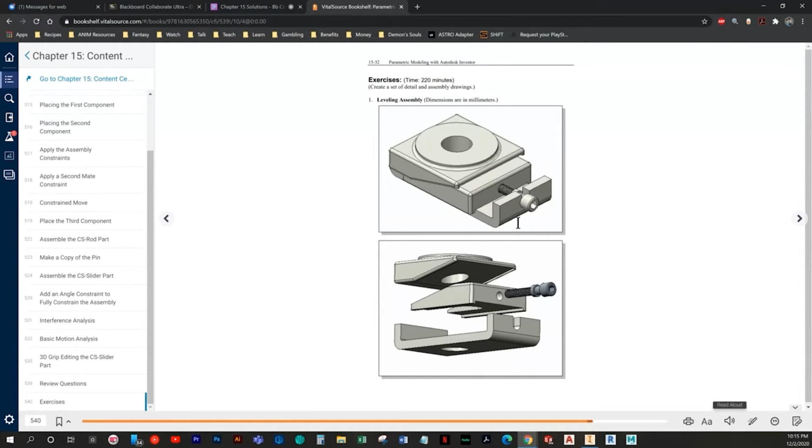Well, hey there, everybody. So today we're going to work on Chapter 15, and it's only 2 assemblies, but they're going to be quite time-consuming. We'll have these parts to model, then it'll have to be assembled, and then it requires a set of detail and assembly drawings. So it's going to be what looks like not a lot of work, but it's actually going to be pretty time-consuming. So we'll go ahead and get into it and start off with this base plate.

And it appears it's millimeters, so make sure you're on your metric templates. I'm going to draw these in the positions they're shown, except for this one. I'll probably do this one to correspond with this part, so I'll draw it on the same plane as this one.

So I'm just going to draw on the front plane, and as always, I'll just draw a rough profile. Make sure you're doing vertical lines and horizontal, that way we get those implied constraints in there. And then I'll just draw here and trim off the rest.

Alright, so then we have fillets on both ends, so what I'm going to do is just slap in fillets on all of them, and then I'll set dimensions after. So for now, I'll do an overall width of 160. And then we have 2 for this one, and 10 for the outside ones.

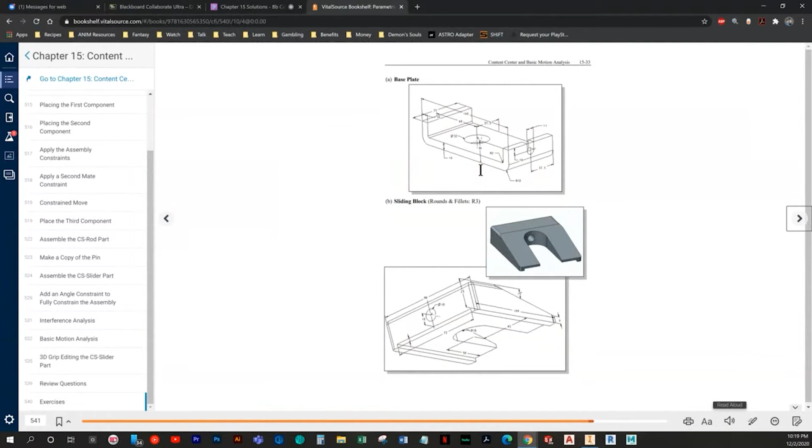And then I can extrude both ways with our value of, let's double check that, I believe that's the 75, but yeah, 75. And obviously that makes sense because half of that is to the hole, so 75.

And let's see, so we'll go ahead and do this hole here. Alright, and it is 37.5, like we were talking about a minute ago, which is half of 75.

And then it's 60. It's really hard to tell, but to me, that reads as... I think that's to the outside edge, because, well, I don't know, let me think about that for a minute. So if we had 60 here and we assume it's 60 there, 10 and 10, that's 20. That'll only be 140.

Let's do the outside edge. It visually looks like it's probably that, and there's no reasonable math that says it's one or the other. If we end up having to change that later because we see something in the assembly that says this doesn't line up, then we'll change it then. But for now, we'll roll with it.

And we can go ahead and just do a cut. And then we'll do this little portion here.

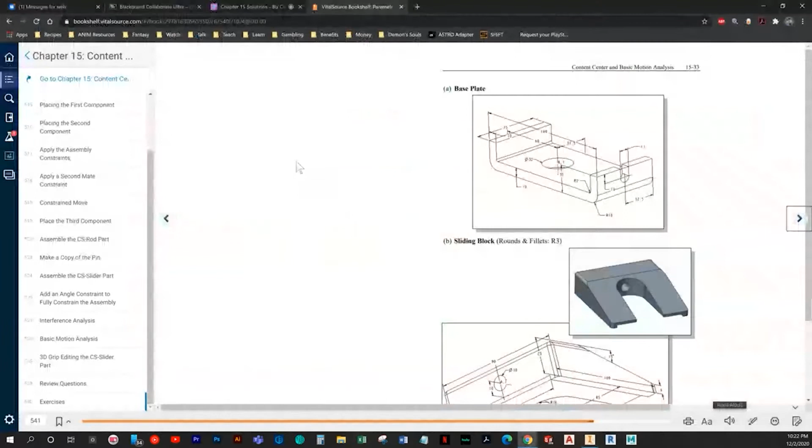Alright, so we'll go ahead and jump to the next one, which will be the sliding block.

Just to make sure I'm drawing it on the correct plane, so we have this one here. The block is going to be the middle piece, so it's going to be slanted down in that same view, so really it needs to be drawn 180 degrees to this. That's going to be a pain for some people, so I think I may just draw it with this as the front view, just so it's not overly complicated. We'll just see where this lands and go from there. I think it'll be fine.

Okay, so we've got a slant and then a horizontal, and whatever, something like that. Okay, so then we'll trim out some of the goods.

And man, some of this is just really tiny. Alright, so it's going to be 6, 15 for the angle, 25 overall height.

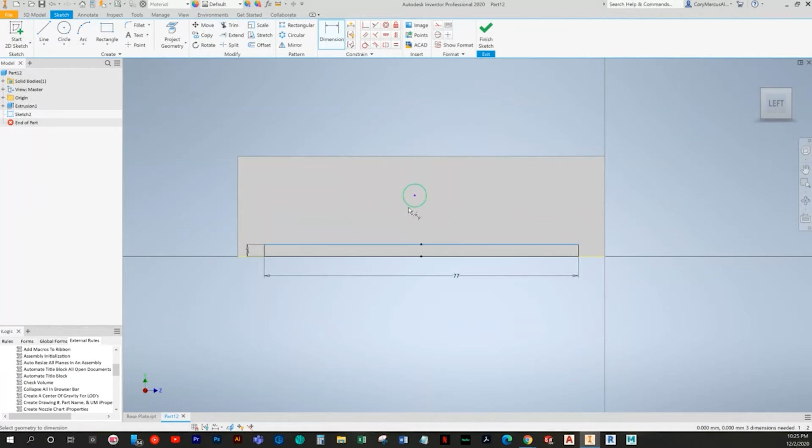And I believe it was also 10 in size, we'll double check that. Yep. Alright, so then we can go ahead and extrude these both out.

Okay. So now, obviously we have a cutout, but we've got that back drawn. So we can do, I guess, a bottom view. And it's going to be your typical lug style shape.

Okay, so put in our constraints. There's no way that just perfectly touches it. Well, apparently it does. How about that? Okay, no biggie.

Alright, so we've got a... Oh, I was wrong, it actually went to the center.

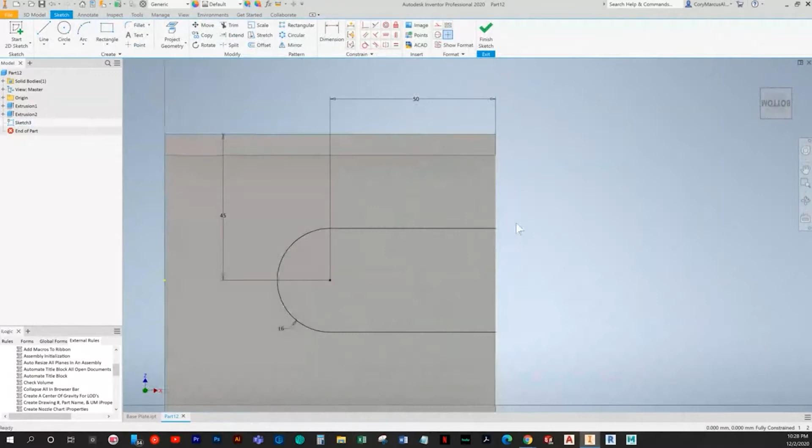So now that we've got that, I actually still do have to go back in here. So I turned this line to construction earlier, but it didn't allow a closed boundary at that point. So make sure it's not construction there.

Okay, so now we've got the part itself, we just have to add in the fillets. And they're a radius of 3.

And let's see, so we have the vertical edge here, and on the back we've got this edge and this edge and that edge. Just double check here on the front, so also we have this edge and that edge.

And that looks to be it, actually. Let me just double check. There's not one here, yeah, okay. So we can go ahead and save this part as sliding block.

And we'll jump to the lifting block. Now this part, it's a little more complicated, but nothing crazy. I do want to make sure there wasn't like a hole thread note or anything. Okay, there wasn't.

Our fillets note is up here, but we'll go ahead and start. Alright, so this will be our front view. And it's pretty much like the other one as far as form.

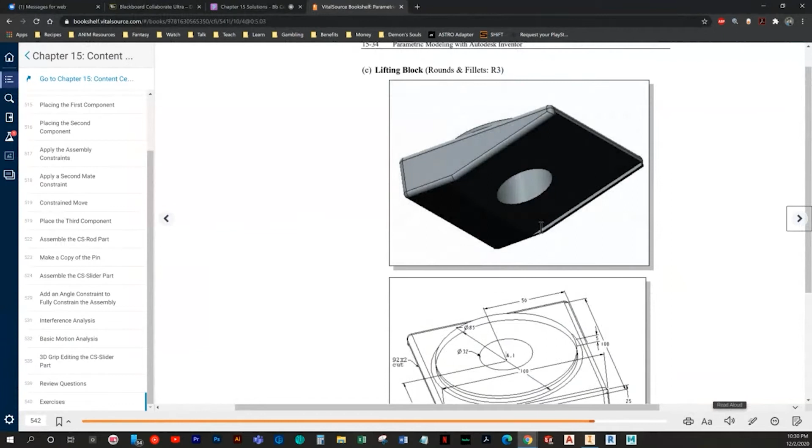And let's see. I'm not sure which plane we'll use. I guess we can. We'll make this point here coincident to the origin to fully constrain it. And its width is 100. All right, so then we have, it's kind of hard to see here, but it looks like a boss coming out the top with a hole through all. So we'll go ahead and draw that.

Okay. Okay, so for a minute I was actually thinking that this 100 dimension was part of a diameter circle because it just happens to be right over the diameter dimension, but it's just the width. That's poor dimension placement. So it is just an 85 dimension diameter with a 32. So I can go ahead and slap those in. And then it's 50 by 50. So I can slap those in as well.

And then we can extrude up 5. Turn on our sketch visibility so we can reuse that feature for sketch. I'll turn that sketch visibility back off. Okay, so now we just need a cut and we can add in our fillets. So this one's kind of tricky, but what you want to do is draw on this plane, and we just need to project these edges. I'm not sure how far it goes yet. I'm kind of just drawing these on the fly, of course.

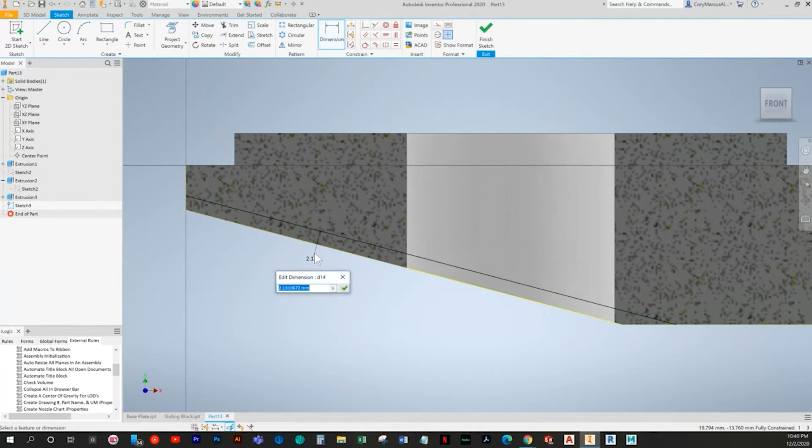Okay, so it's 92 by 2. So let's start by offsetting this edge, and I'm going to extend this back because this part wouldn't exist, nor would this. So I'll extend here as well. And I'm just going to slap in a very generic 2. And if you've got all your stuff projected, then you no longer need to add anything. So you can just do the same as I did and just get to cutting. So it's 92. And you end up with a nice little shape like this.

So then you just need to add fillets of 3. Okay, so clearly we know we need this one. Appears we pretty much need every edge on this one. Okay, so we've got that one, that, and here. It's going to be here, there, and it's going to be the same on the other side, of course. Make sure we got all of our edges. Okay, so basically anything that touches. Now, since we're going through here, I guess I could look at this edge, but I'm going to leave it not filleted. And we can save it as lifting block.

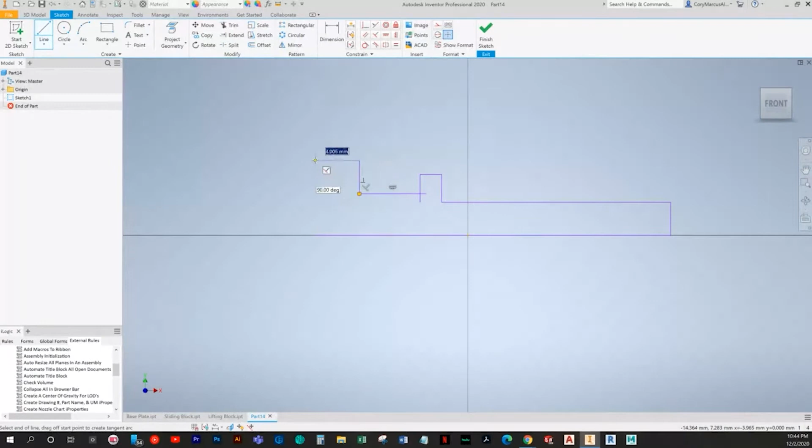And it's 72 long, noticed. And I'm going to do this as the front view. And of course it'll be a revolve, so I'm going to do basically that in half. Okay, so we've got a very long shaft. It's probably good not to make everything in line, or it may imply some constraints. I'm just going to trim out some of this to make sure it's uneven. Okay, so overall 72. I'm going to make this line a center line and make the midpoint coincident to the origin point. We've got a width of 12, 11, and 5.

It's kind of hard to see this. So this is 14. The diameter is 10 for the actual screw part. And this middle portion is 10. And this is 16. Okay, so we've got a head hole, so we can draw this portion, go ahead and revolve it. And I could add the chamfer in here, but I really like to have my chamfers elsewhere. So it's nice to have it as a feature. It's really easy to add and manipulate later if needed.

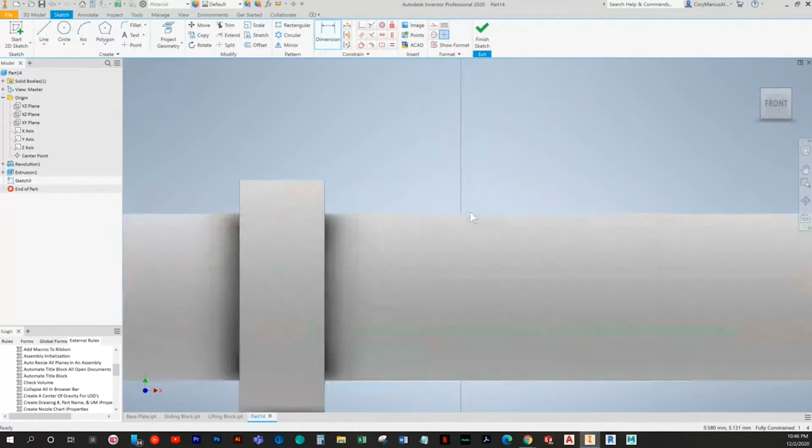Okay, so now we've got a nice little hole. I'm going to go ahead and just talk about the coil feature in case you do want to use it. It depends how you want to go about it, but it's usually a lot easier to draw a triangle that is cut in half here, and I'll just show you roughly how it would look. It's not something I really would advise doing right now, just because, like I said, you really don't know what you're doing at this point.

But you never know. You might like what you see when you do it and go for it. I don't know what the height is, so I'm just going to give it a value of 1. And then, for instance, I could do a coincident for this point to these two edges. Okay, you know what? We'll just do a collinear here.

Okay, so now say I had this. I could do a coil command, and I could choose an axis once it chooses that profile. And I don't know how long this was, so we'll just say I have 10 rotations of this. Obviously that's super long, but it's fine for the sake of showing this. The pitch would be whatever the actual width is. I didn't measure, but I'm guessing it's 1 since it looks to be equal in size.

So I could go do like 20, 40, 45, whatever. So it's roughly 44. So when I do that coil command, it also actually is preferred to go further, and I forget that it has this little extra portion. So really, instead of halfway, it's a little bit easier to, let's delete this line, delete that constraint.

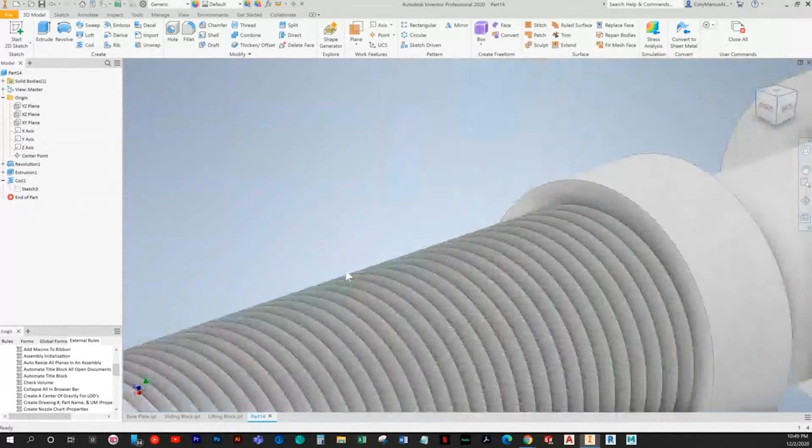Okay, so it would be better in this case to start it with this corner completely in the head. And basically what that enables you to do is start completely in a model, so there's no transition. You see that line right there, and hopefully this doesn't crash my computer like it's acting like it's going to. Whew, it's really thinking, wasn't it? Okay, so now we've got this perfect transition, and it looks nice.

But you would have to do the math to make sure it's not too big as it is now, and you want it to come out perfectly at the end and all of that. You would have to do a chamfer on it, and it's quite a bit of work for somebody that doesn't know anything about fasteners. So it's a coil command, and you could also just cut away instead of adding like I did, but that's the general premise behind it. I wouldn't advise it. That's for down the road.

So for now, let's just do a thread command, and it's going to be an M10 by 1.5. And we want it to be from the other end. I've noticed the tool is kind of finicky about that. It's all about which end you click on. So if I click on this side, it starts there. If I click on this side, it starts here. So it runs the full length, but in case you don't have it set to full depth, that's one of the things you need to know. So it's M10 by 1.5.

So then the only thing we're missing is our chamfer. And the reason I put the chamfer after is because, if you have to adjust it later, it avoids it not knowing where the correct end is. So I would advise doing it after the fact, always. And we only have to put in a length because it's a 45-degree angle. So that's it. We'll name this adjusting screw. And then we can jump into the basic motion analysis.

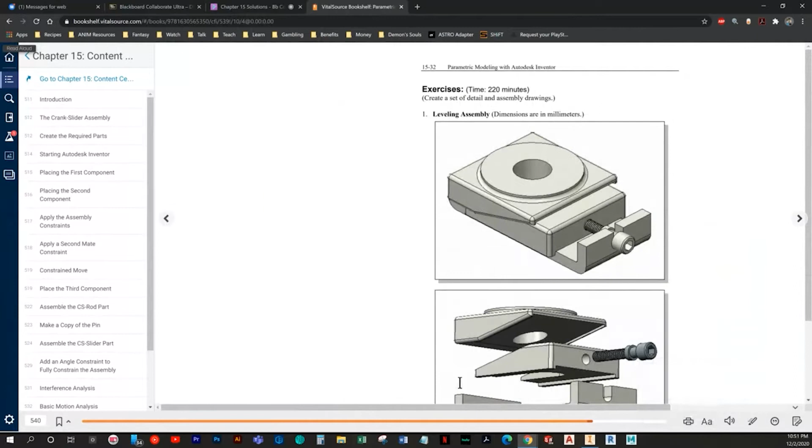So we make an assembly here and slap it all together, and then I believe we do the analysis. So let's just take a look and make sure. Yeah, okay, cool. We'll just need to do a drive constraint, animation, interference analysis. I'm going to go back to the assembly so I can see what I'm slapping together here. Okay. So first of all, I'll just do a place and choose all of our hoopla.

Just paste it all in. Hopefully nothing was grounded. I don't see a ground symbol, but just to double check. And I'm a little petty. I like to have shaded with edges on, so I'm going to go in and change that. Now since this is our base plate, I'm going to use it as our foundational piece and constrain it to the origin.

So I'm going to do XY to XY. Hopefully each one of these planes should correspond pretty well, and they do. That's the perk of drawing it on the same planes as the origin plane. It tends to be a lot easier to work with for sure. Okay, so next is this guy. I'm just going to move some of this stuff out of the way as we go.

Alright, so this one resides here. And then, let's see, so it mentioned analysis, but I didn't really pay attention to which parts. So between the sliding block and the base plate parts. Okay, so that's the lifting block. Okay, so yeah, this is the one I need to do it on.

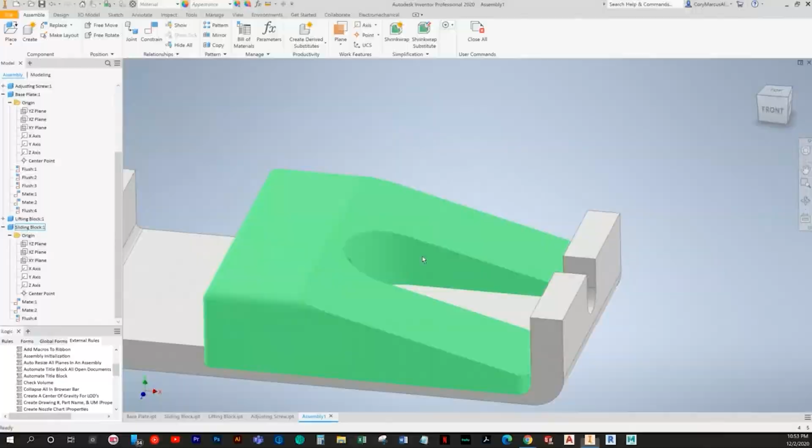So when I hit this, I change the selections, and then it actually, oh my gosh, I'm tripping. I'm sorry, guys. Okay, I had it right to begin with. No, I didn't. Okay. Sorry, long day. I'm going to delete these two constraints.

Or I guess I could flip this one to be a mate. It's going to error out. I hit accept, and I'll delete this mate. Okay. Now that looks like it's supposed to. So now I just need to constrain this face to this face. And our hole lines up fine. Cool.

And as you see, our groove fits. So I was just making sure. You never know with that kind of stuff. The one thing I hate though is this. There's this round portion, and it's really intersecting it. It's fine, I guess, but because of that, I'm actually going to make it drive from the other end. So we'll constrain it there. It's the same problem. Okay, so it's fine. We'll just leave it.

Lord. Try to be a perfectionist. Sometimes it doesn't always work out.

So we can constrain this face to this face. And let's go ahead and do the plane one first. It seems like an easier one to pull off here. Alright, and we're going to flip it.

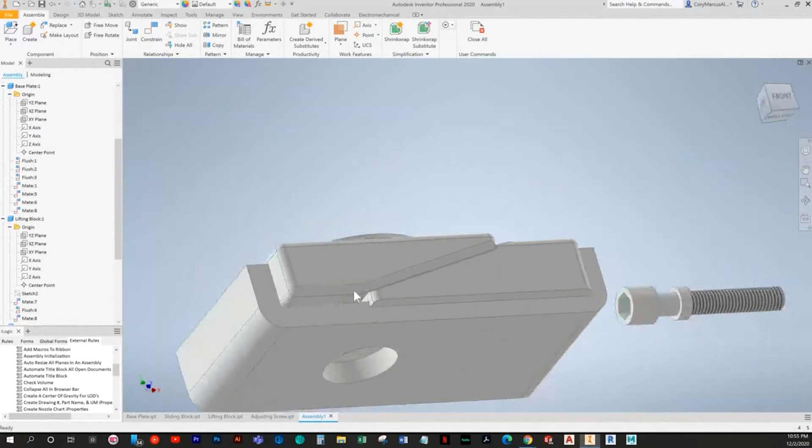And really, it's kind of a tough one because I want to go ahead and immediately put in joints, you know, and try to get it to position itself a certain way. But I don't think that the exercise really necessarily wants you to. So I guess what we could do is maybe try the same trick here. I'd be lying if I said I was very familiar with the drive constraints. So we can see if that works out, and if not, we'll reassess.

And then I'm going to be a little lazy here and just do an insert to this circle, because that is always going to be in that slot. And even though you won't be able to see it, I like to have everything where if you tug it, it doesn't move at all. So I'm going to choose the base plate and that adjusting screw and give them the same angle. So now, even though it's hard to see, if I tug it, it doesn't spin. So actually nothing moves right now.

And unfortunately, I don't know what's going on here, but our home view is not set right. So I'm going to right click that and then set current view, fit to view. So now when I hit the home button, it saves right. And I'll make my leveling assembly. Alright, so let's play around with these drive constraints. Okay. So we do drive.

Let's try expanding it. Huh. Collision detected. Alright, so how about we... I'm thinking let's not have this and let's see what it does then. Because it slides freely, but that might be part of the problem with why we can't do it here. Alright, so collision detection is on. It does it again. Okay. Not bad. It's definitely not good, but it's definitely not bad.

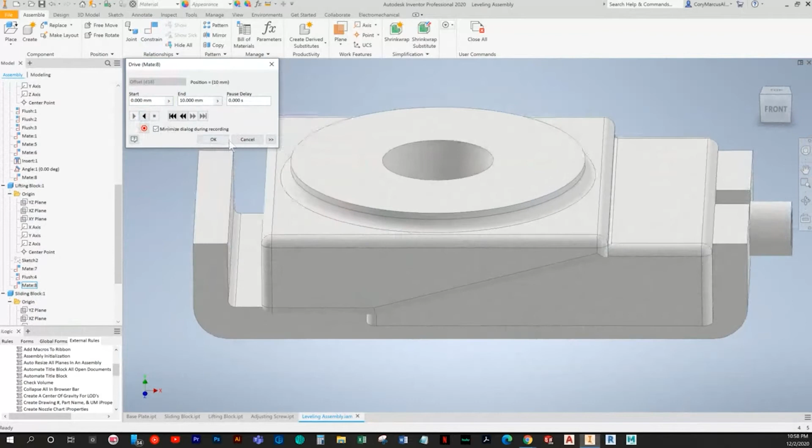I mean, that's pretty accurate. Let's see about this one. Yeah, actually, I like that. Okay, so basically we right click, drive, test play, and more or less what happens is it'll shift so far here or so far there. And honestly, I don't think that the book is really asking for much more than that.

So, you know, what can you really do? Okay, so, yep. So that's fine with me. So let's go ahead and work on our drawings. And in order to do that, we're going to need to have ViewReps, of course. So I'm going to make 4 new ViewReps. And just name them. I don't know why it makes a default now. That's new to 2020, but I do not like that.

Okay, so I'm just going to go through and isolate each one and lock it. Thought I messed up for a minute. Okay. All right, so we can save that, and now we've got our various representations. So now we're going to go ahead and make our assembly drawing piece by doing an exploded view. So in the past, I did position reps, but honestly, they're not really great for a true exploded view. So this time around, we're going to do them the optimal way by doing a presentation.

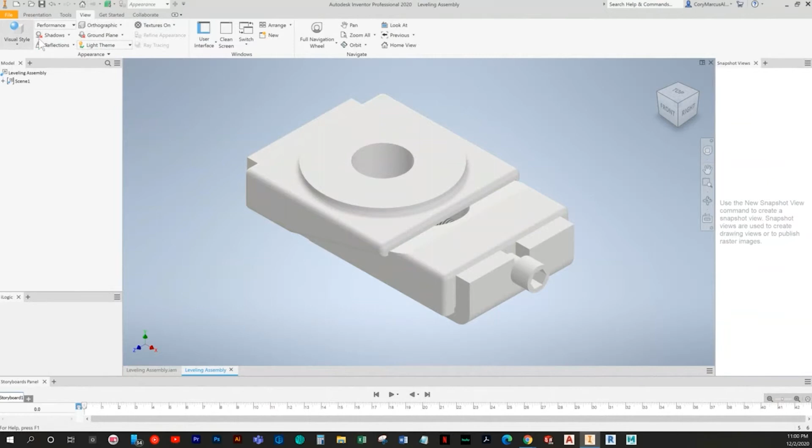So all you have to do is choose a part and choose tweak components from the presentation panel tab, and it'll let you manipulate them fairly easy. And if you've ever used like Maya, this is pretty similar to that. And also SolidWorks kind of has a similar process. So I choose a part, choose tweak components, and then I can use these pieces of a gizmo and pull on it. And yes, it actually is called a gizmo.

So I can pull these grips. I can also pull these planes to move in 2 directions at the same time. But note, I've moved it 3 separate times, so now I have 1 move, 2 move, and 3. So note, every time you pull it, you actually are doing something. So keep that in mind. So what I'm going to do is, let's see, how do I want to go about this? So obviously this one we can just bring up and over, and this one we can move up, and not, that's too high.

Okay, so let's do that again. What I think I'm going to do is basically just pull it up and slide it underneath it here. And I wonder if you can edit path here. Yeah, edit tweak. Okay. So what I want to do, I kind of want to move it over further. Okay, so that's fine. So now what I can do with this one is move it, because it's got to come up out of that. I can pull it. Oh, I accidentally clicked the wrong button there. So I can pull it up, and then I can pull it back.

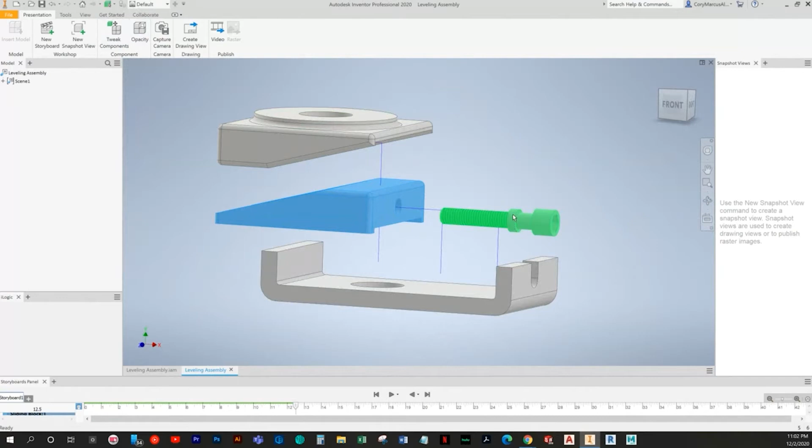And you know, it's not like the greatest looking thing, but I mean, really, what else can you do with it? I guess I could redo. Dang it, I lost part of my tweak there. Okay, so that's fine. Make sure you're hitting the check mark when you do these, and don't hit that plane. So what I keep doing is accidentally clicking the wrong gizmos. You got to hold and make sure you're being more methodical about it than me.

But this one, I'm going to delete this tweak, and then I'm going to edit this tweak, and we'll pull it up a little higher. Yeah, I think that's how we'll keep it. The trails are pretty obvious. I guess I could lower this one back down now that I've looked at it a little better. So anyways, now that I've got it set, I can save it, and we'll just call it leveling assembly exploded. It's really a presentation, but we're only really using it for that purpose.

So now we've got this guy for our details, this guy for our exploded. We can make a pretty chill drawing set. So we'll start with the exploded one first, since it's kind of low-hanging fruit here. And basically it's saying, blah, blah, blah, I'm going to make a snapshot for you. And it failed to do so. Interesting. Okay. Why you do that?

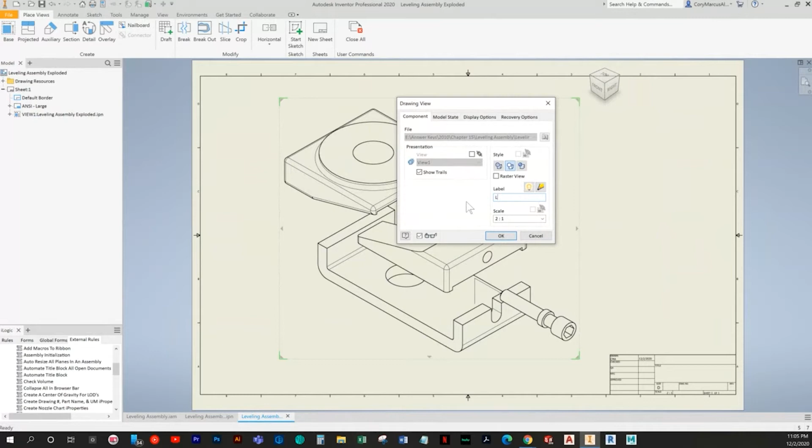and we'll go ahead and put a title under it, Leveling Assembly. Make sure you're using all caps. And I will shift this down, add a parts list. And you know, in later classes we'll hunker down on BOM filling out, but for now, make sure you do have your BOM. And just bubble your items.

And if there's an option, show your tweak trail. Let's see. There's no option for it, it appears. Yeah, show trails. Okay, so it's on. And I see them now. I just didn't notice them at first. They're here. So I'm going to move this over a bit. And yeah, that's the first one, actually.

It's not too bad whenever you actually get into it. I believe it calls them assembly drawings. That's really what it is, but I just want to make sure we're keeping the name scheme the same as the book. Okay, so leveling assembly drawing. Seems silly, leveling assembly drawing, but that's what it is. So we'll save all that, and I'll close this one. I'm gonna go ahead and close the presentation since we're done with it.

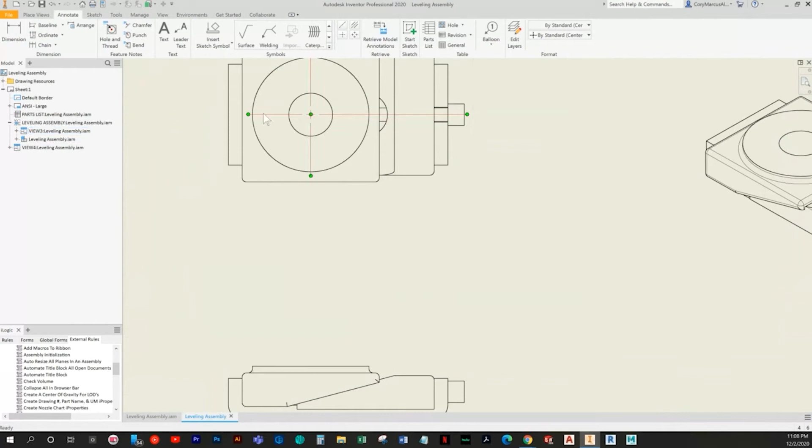So there's really not much you can do here. It's obviously centered and positioned. So if you want to throw in some reference dimensions, you could. I'm going to try to put in a few. I'm definitely going to put in center line. I really don't know what else you could do here besides that. I could put a center line through here, I guess, but I'm just going to generically expand this and call it a day.

I am going to kind of do the same here and just extend this out. Just so it says there's a hole and it passes through stuff, but it's really not great. And just to give myself some feeling of accomplishment, I'm going to give an overall and an overall at the least. It's always good to know what you're working with. And let's see, we'll do the same here.

Alright, so we have 4 parts, so I'm going to go ahead and make our sheets. And if you want to name these sheets, that's always a plus too. And we'll go in order of BOM. So adjusting screw, then base plate. But you know what? Let's make it match the book. I take that back. Okay, so base plate and sliding block. So base plate, sliding block, lifting block, adjusting screw.

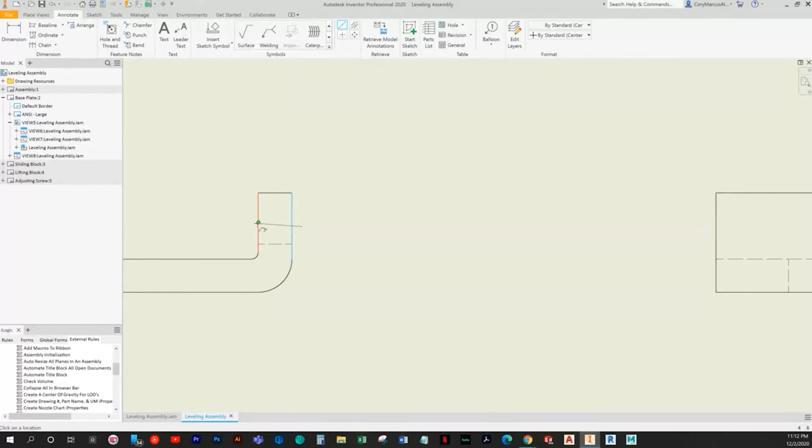Okay, so we'll place in our base plate. Make sure you've got this checked always. And you kind of really do need every view of this one. That way you can detail this and also that. I guess this is the least used one really, but I'm going to put on hidden lines. That way we can see all of our details in every view. It always helps a lot. And we'll just bubble each item in the ISO view for all of these sheets.

Oh, that's weird. I could have sworn I hit the center mark button. Okay, so we're just going to add in some center lines. And that one would kind of be a pain, so I'm just going to let that one be.

I mean, I guess I could see if it gives us an edge. I mean, it does. Yeah, okay, we can work with that. So perfect. Not at all perfect, really.

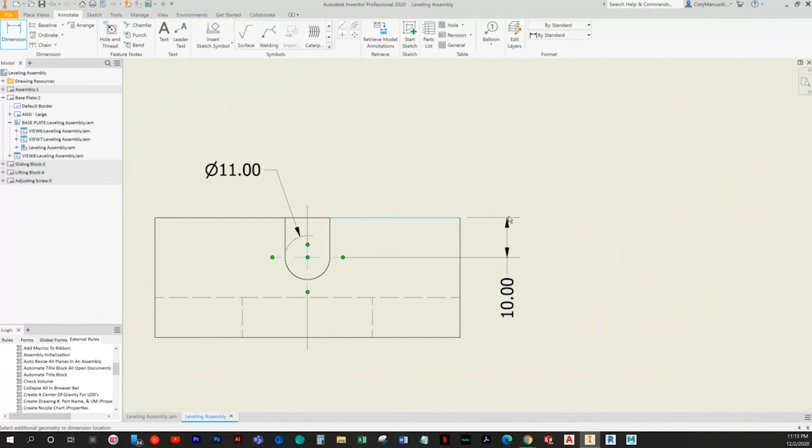And note how I'm keeping dimensions off the model. Please do the same, and make sure you've got your gaps. Really try to keep spacing similar proportionally. Notice how even this I kind of try to keep it in line, even though there's not a great way to align it. You can just do it by eye.

Let's see. I like to do a diameter here, just like I did in the book, or the model itself. If you do it like this, then you know that the width matches. So instead of having to deduce that the radius matches the slot, it's easier just to give that one value.

And I'm going to keep the dimension off the model. We're actually going to pull it over here. And I think that's it for this view. So we can go ahead and reposition things if needed — maybe shift that over a bit, pull that down.

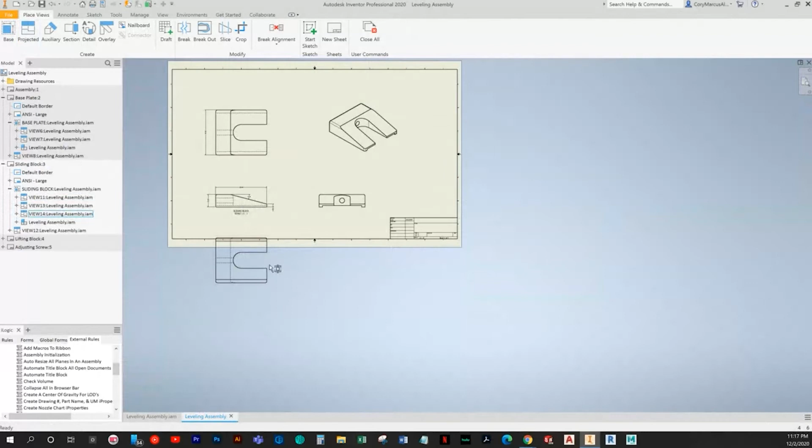Alright, so got a 6. I think instead of this view, what we're going to do is a section view.

Yeah, I kind of want it. Okay, I thought about it. I want to see that groove really well. And the only really — I'm thinking of the wrong part anyways. Okay, yeah, we'll just do it projected. I was thinking we were looking at the one with the 92 by 2.

So anyway, so we've got 15 and like 100.

I think it would make more sense to have a bottom view, as crazy as that is. Just because, if I dimension — well, I guess it's fine. They'll never know the difference, but really it's elongated here, because it's not true to size, but I don't think that it would show any difference in value.

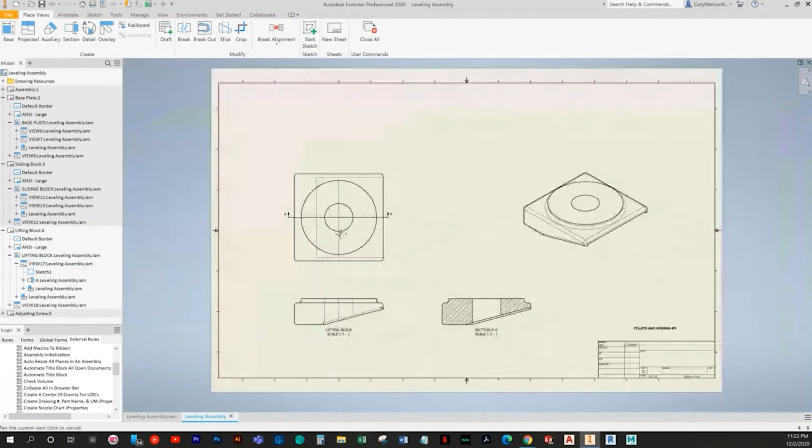Okay, so we'll do this position. And same deal, we're going to scale it to 1.5 to 1. Make sure hidden lines are on.

Add in our center mark, center line, and let's section this one.

All right, so we're going to break the alignment on it. Instead of having this useless view, we'll just have it right here, and I'm going to change its alignment to be — oops.

I'm going to change its alignment to be horizontally aligned to the original lifting block. Unfortunately, I should have chosen further for these, so I'm just going to edit that real quick. And delete my coincidence here. Come on, you.

Yeah, so basically you generally want your line to protrude past your actual feature. So what I was doing was editing the actual line. You can right click it and edit to do that.

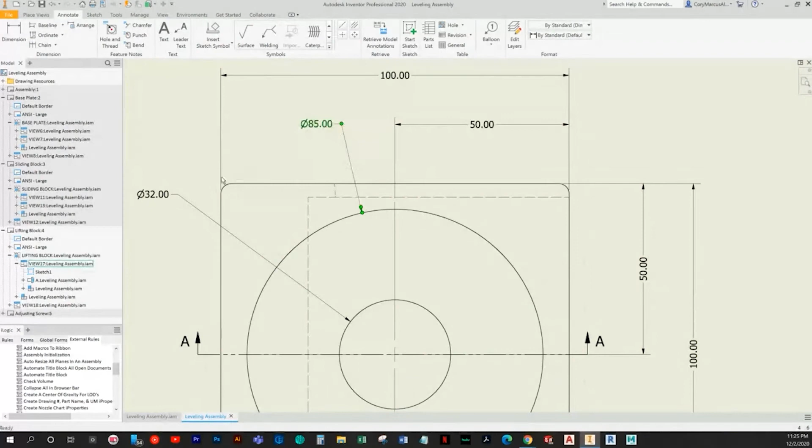We've got the width of 100, a height of 5, height of 25, 7, and our angle of 15.

You know what? We kind of needed a side view for this dimension. You typically don't want to dimension hidden lines. Let's see how goofy that would look with a side view. Man, it's unfortunate to have it. You know what I think I'm going to do? This is a little bit cheating, but...

Let's do a leader, and let's just say that same note we had before, 92 by 2 cut. Totally cheating, but it would be kind of silly to have a view just for that. I mean, it's really not, but in this case I just don't want it. This is a nice layout we have, and it's pretty uniform, so we're just going to roll with it.

All right, so the only thing we still need is the width here of 100, and that makes me have to shift this out. So we'll actually put it here and bring this one in for the same reason, to try to make it a little more tidy. And we'll reposition it.

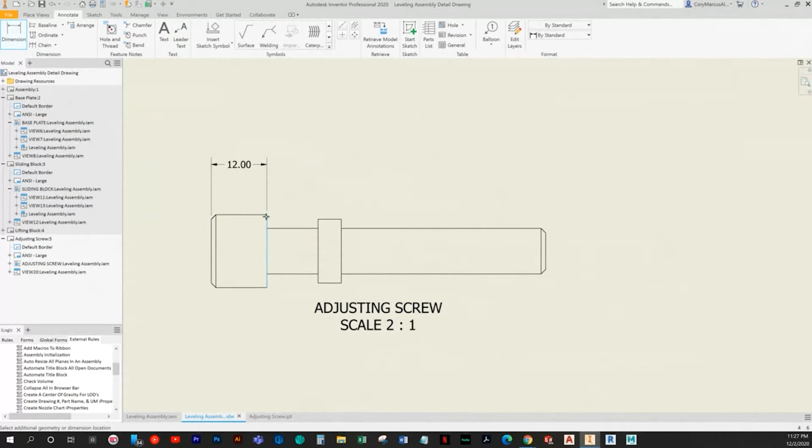Oh my, I forgot a chamfer earlier. I just now realized that. Okay, so let's see, it was here and here. Unfortunately, that means that we need to update our assembly and our assembly detail and assembly drawings. I'm going to save this first before we get too far in the weeds.

Detail drawing. And let's open that assembly. Oh, I'm in my downloads. Okay, so let's open our exploded and our assembly drawing and update those. Reason being is now there's a different part, it needs an update. So I can close that. And now this needs an update. I can save and close that.

It's always good to keep your files up to date, especially when you turn them in. You don't want it to be jumping around when I get to it. So, all right, you slap in our values, and if it ends up not having enough room for the dimensions, we'll bring it out a little further. But this one's fine.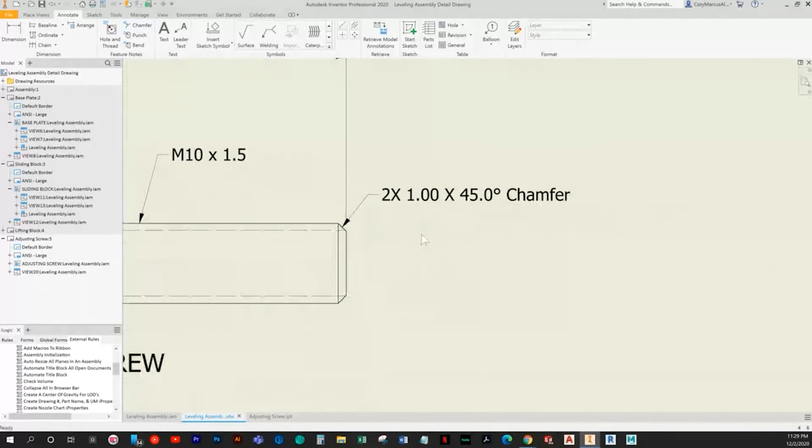Let's see. There should be an option to show your threads in here. I don't see them, so... there we go. Yeah, so turn on the thread feature in your display options. Double click the view, display, thread feature. That way it implies there's a thread.

And then I'm just going to do a leader. Come on, you. And I'll say, what do I want to say? M10 by 1.5.

We'll do a chamfer. What is this crap? There we go. And we'll do 2 times since we have 2 chamfers. Oh, that's bad. Okay, so we'll put it in parentheses to make it a little more clear.

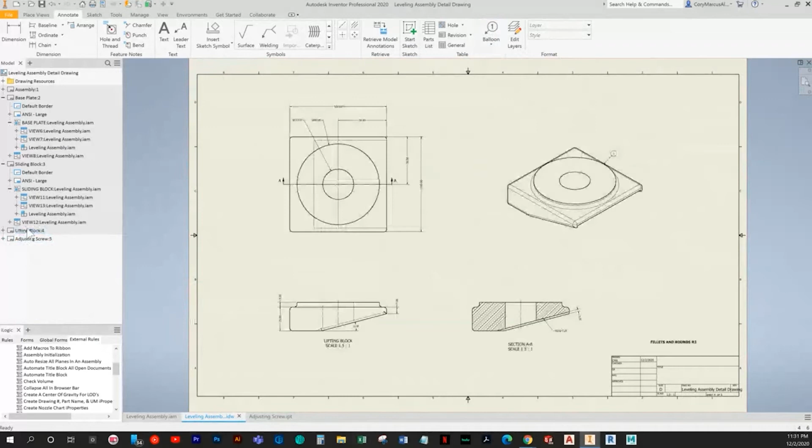And then I'm just going to add in a center mark and put in our 10 value there. We really need hidden lines, so I'm going to turn that on. And then the more you look at it, you think, oh man, but I don't have a depth here, so I am going to section it.

So just like that, the plot thickened quite a bit. And I'm just going to place it over here for a minute, and then I will do an alignment break. And let's see, where would we like it?

You know what? I'm going to flip the direction, and we'll just have a depth dimension there. We could just have a note, but why not? It's nice to know the applications, what you can do. So we'll have a section here, and I'll pull this down so it's not in the way. We'll just put this right here since we've got this all laid out.

The K factor, that's actually not the standard. It's usually 0.44. And standard should be round relief, so let's go back and choose corner relief shape round. Okay, so now we can draw that top view, edit my sketch that I had started.

Let's see, so we had a vertical line. It really was kind of like a shape like this. I'll just add to it in a second.

We'll just draw and trim as always. Okay, so now I've got double circles.

And I know that this circle is going to equal this one with that one. Odds are they're probably all the same hole size. Dang it.

Okay, so now we'll put in tangent. Sorry, just making sure I'm sharing—it's all too easy to forget if you are.

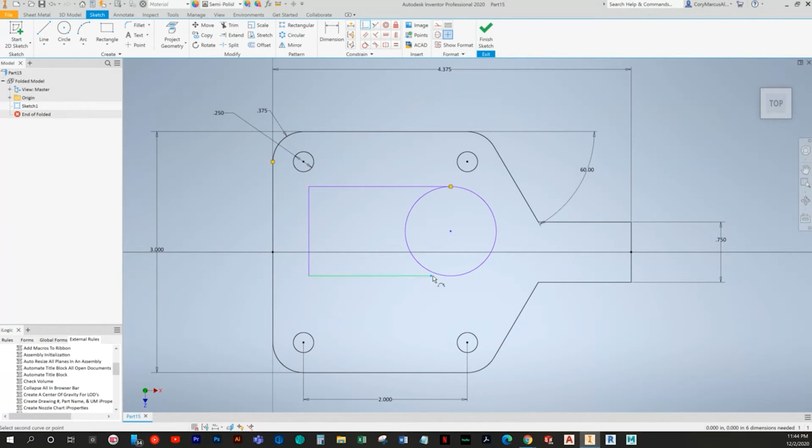Let's go ahead and make this point coincident. This 4.5 dimension is what makes it hard. Okay, so basically it's the thickness here to here that's the difference, so I can subtract 0.125 from the overall, and that'll give us our overall. So 4.5 minus plate thickness will put us at the end of that flange. We'll double check to make sure that works, of course.

And then we're going to do the entire middle portion that I forgot. It's going to be a circle with basically a rectangle. We'll probably have to put in some parallels or something because it seems like rectangles always like to break, but we're good there. Okay, it's fine.

Alright, so from here, it's a decent starter. It's not too bad. We've got a rough shape, so we just need to add in a bunch of flanges. So we'll do these 2 first. So I'm going to choose the edge, and it's set to be quite large apparently. I was sitting there thinking, how can the bend radius be so large? It doesn't appear to actually be 0.5. Is it 0.05? Yeah, it's 0.05. Did I read that wrong? No. Okay, so take note, everybody. Go back and for your bend radius, make it 0.05, because that's gigantic on a part like this.

And so we'll choose the flange again, and make sure you're choosing, thought it was right here. Oh, okay, it's down here. So expand this out, change it to width, because we don't want it to be the full width that's there. We want it to be 1.25 wide. So we're going to change that to 1.25. And then, I wonder if we can choose this other edge at the same time. Kind of. Okay, that's fine. We'll deselect that and it'll let us. Okay, well, bad moves, guys. It's fine. So expand it, width 1.25, centered.

Make sure it's centered, and then we need a height of 1.3 plus the radius. So 1.3 plus 0.625 is 1.925. Alright, so 1.925 long, and then we want it to end where that edge began. So looking at it, it actually does, it appears. It didn't do round reliefs though. Weird. Wonder why it didn't do round reliefs.

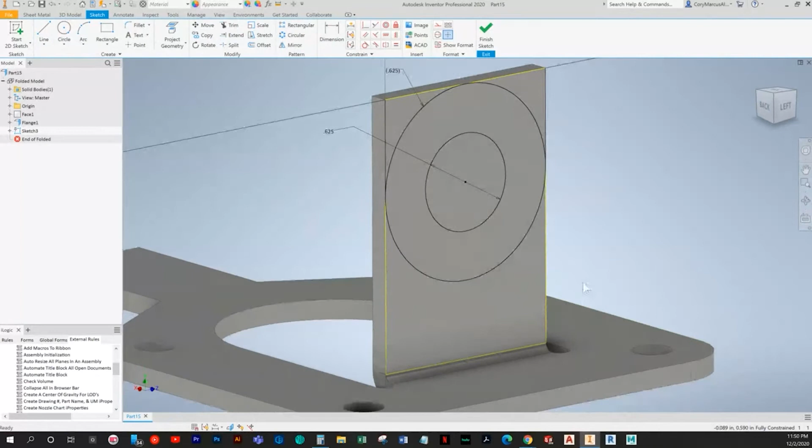I wonder if we can do a corner seam after the fact. Doubt, but no. I guess we could try doing a corner around here. It's really not the goal. We might just roll with that. That's fine for now. Let's press on and see if this other side works out. Okay, you know what? It's because I changed it in the wrong spot. My bad. So we need to go back into our sheet metal defaults and change this to be round as well. There we go. All right, so now we can press on.

And since these are the same, what I'm going to go ahead and do is cut out portions of this, and we'll just basically mirror it across that face. That way we don't have to work as hard. All right, so that is 0.625, and just to verify our values are correct, let's do a radius. Okay. And it comes up to 0.625. Okay, so we can do a cut and trim the excess because Lord knows it's got to be a pain.

Well, what we'll do is we'll just draw in this part. Make sure it's fully defined, of course. Make these two lines down here construction. So now when I choose cut, it'll only choose... oh, don't you love it? Okay. This is one of those things where sometimes it's just easier to use extrude. I don't know why. The tool itself can be very finicky, but if you use an extrude, it works fine and doesn't have problems figuring out the profile.

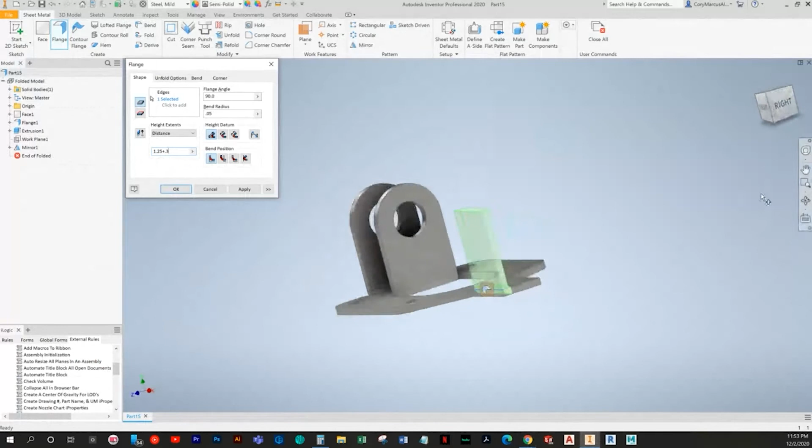So I may have actually put myself in the corner here, but I want to try to make a plane between this area here. Let's first make sure I've got the 1.1 value correct. Okay, so it's good. So I guess what I could do is 0.775 over. I can do a plane. So we can do 0.775 divided by 2, and that's going to be the middle distance between this and here. Yeah, cool. And just to verify, let's measure that, 0.775. And it should be 4.5 to the other end. Nice. Okay, so now it's starting to look like something.

So then we can do a flange on this side, doing the same general idea really. And it's going to be how wide? It actually doesn't say, so that's interesting. It looks like it's auto projecting this. So let's just take a look at how this turns out and see. So the height itself would be 1.25 plus 0.3, so 1.55. I guess I could also just be safe, type it in. And we need it to be inside of the edge as well. So it is. So let's see how that does. Yeah, so that's perfect actually.

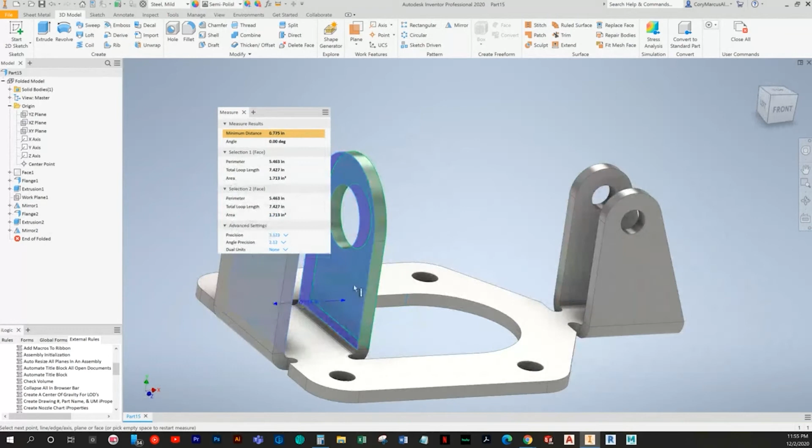And it appears it has a bit of a lift before it comes over. Oh, okay. So it's just to the edge of that bend. So what we're going to do is draw a line, and we'll make this end coincident to that end, this edge tangent, and then let's just trim off the fat here. And then we're just going to do an extrude, cut both ways, and pick this extra bit. And I forgot a part.

All right, so then we can just do a mirror of those two features using our origin plane. Come on, you. Okay, so let's just verify some dimensions here. Should be 1.25 there, and 0.75 between the faces, the outside faces. Let's see.

Should be 1.25 here, from here to, oh, it's actually here. So 1.1, 0.75, 775. And then 1.3. Yeah, okay, so this looks good.

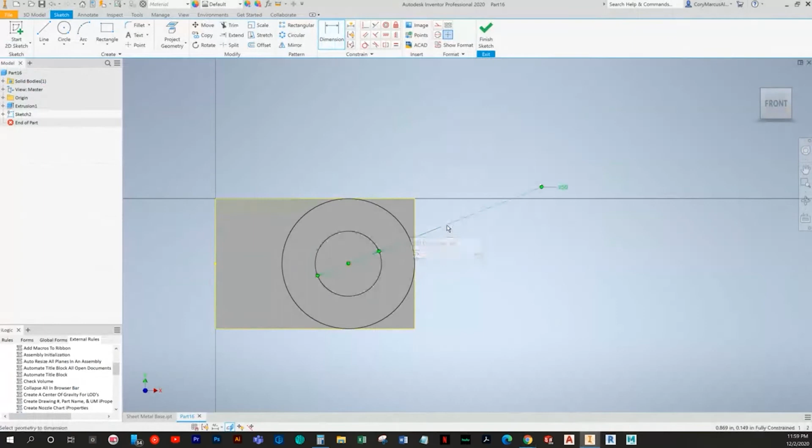But a lot of times you do end up having to do perpendicular constraints and parallel ones that you typically wouldn't have to bother with. So there are definitely drawbacks. So we'll set these to equal each other. And we'll do the same here. And look at that. It's already reared its head. So the overall is 0.5 plus 0.75. Or 0.25, which equals 0.75.

And just because I don't know what we're going to be doing with this, I guess I'll just make this portion line to the center. Is that great? You know, I honestly don't know, but it's fine. It's 0.5 plus that, and then it's going to be extruded 0.5 both ways. And we'll add in our little cut and our second circle.

Alright, so we can go ahead and do an extrude. There we go. And our circle is 0.313. Oh. And it's 2 overall, so 1.5 for this shaft. And then we need a chamfer of 1/16, aka 0.0625. Nice. Okay, so we can save that as connector.

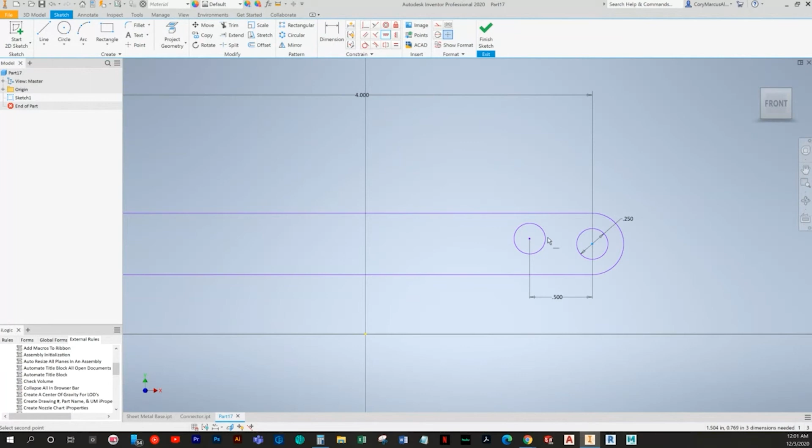And let's jump into the handle. It's really basic. Shouldn't really take long. Okay, so I'm just going to shift this and trim. We'll slap some tangents on here. And we can trim out that. It's going to be 4 wide. And it's 0.25.

And we're just locating things at this point. So let's go ahead and locate this thing in reference to the origin. I'm just going to use some vertical and horizontal constraints to tie it in. And then we will extrude at 0.25. Okay, so that's the handle. These parts are a lot easier than the other one, of course.

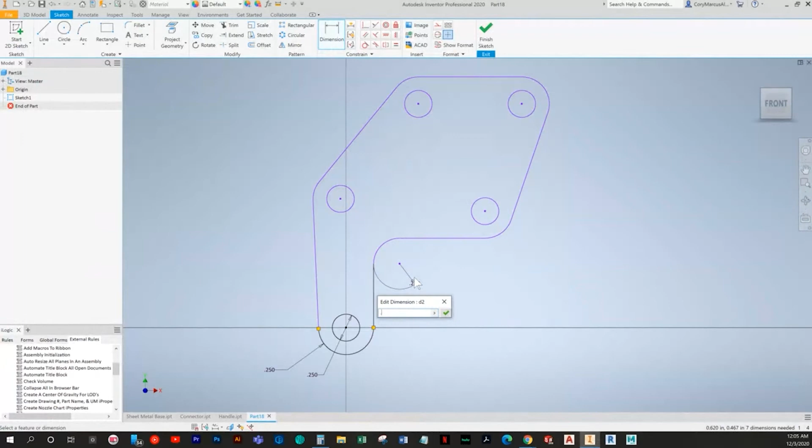Okay, so now let's do the same with the smaller holes. All right, we can put our tangents.

So I mean, is it perfect? No, but you know, you get the idea. So I'm just going to extend where needed and trim where needed elsewhere. Let's make sure this one was extended already. It was, okay.

Alright, so is that to scale? No, but it's not a bad start. So 0.25 and also 0.25. Turns out this is 0.25. It's a good thing because apparently I made some false assumptions there. Okay, so these two are vertically aligned.

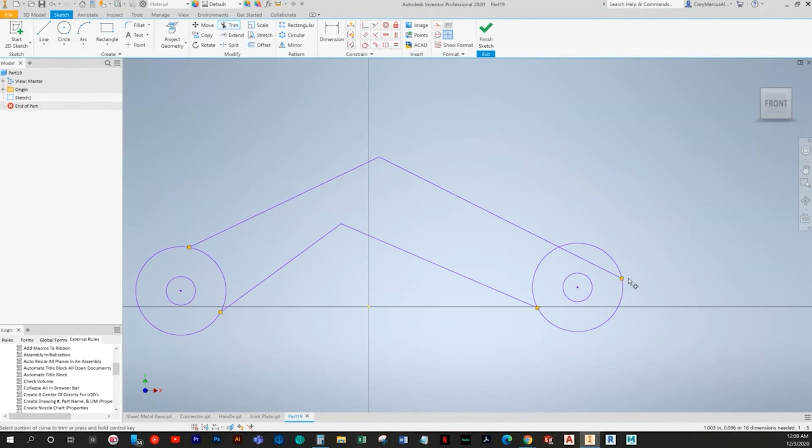Okay. So you may be thinking, this 60 is between those. Yeah, that's true. But this line is parallel to the center lines, and this line is parallel to what would be the center lines here. So all I'm doing is condensing that a little bit and trying to save from having to draw extra. You could, but it's going to turn out the exact same way. So this is kind of the idea of just working smarter, not harder. Alright, so now I'll extrude that both ways and name this the joint plate.

Alright, so next is V-link, and it looks super basic. But it's not actually all that basic. I like that. It's not, you know, symmetric here. The gap is varied, so that'll be a fun example. And I guess technically you could do half and mirror the other half, but parts that are simple like this, I like to kind of just get it all out there. But you're welcome to do it however you want. At the end of the day, it's not going to matter that much. And if you hate it, you can always redo it, you know? So, come on. Not to scale.

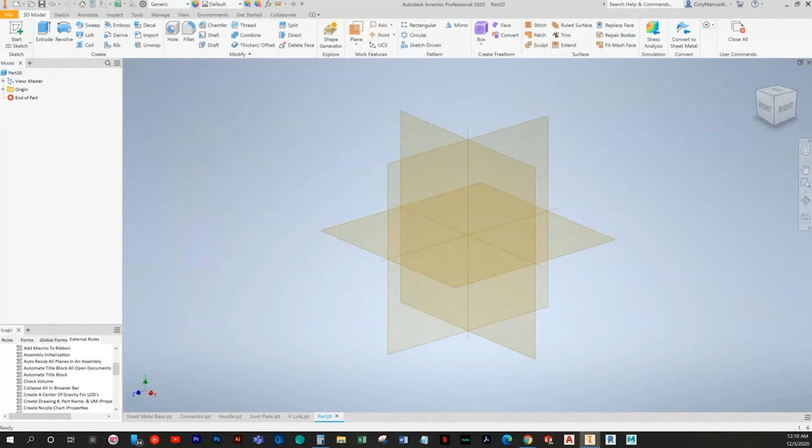Alright, so I'm going to trim these guys. So it's radius of 0.25, diameter of 0.25. Be careful of the typos. Make sure these 2 points are vertically aligned. And let's go ahead and align it with the origin while we're here. And I don't know what the intent is, but let's align these circles with the origin, and align the circle with the circle.

Uh-oh. So we've had it invert. That's because we have yet to set these arcs to equal each other. Okay. So we need an angle of 138. And 0.75 for the width. It's a bit out there, ain't it? I could set it to be the same value. I'm just going to hit equals and set these to be the same because this part is symmetric. So why not?

And we'll name that V-link after we extrude it, because I almost forgot about that. 25. V-link. There's quite a few parts to this one. All right, and let's see how to begin this one. So let's do this view here, and then it'll have to be quite a few features, so we'll just start with that. But we can just do an extrusion of a circle. Oops, wrong view though.

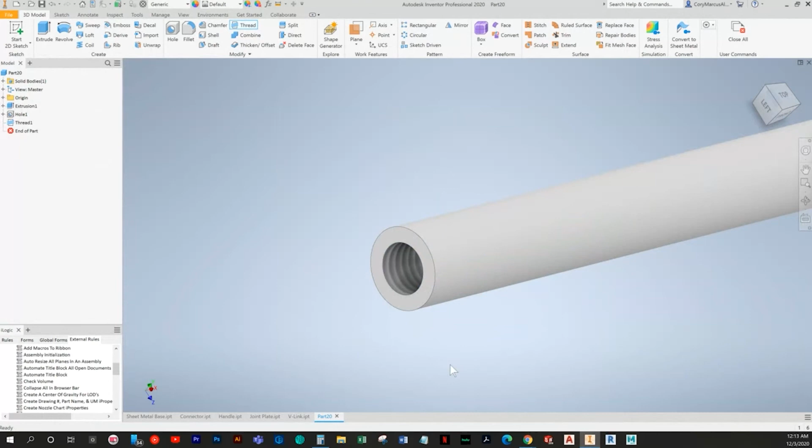So let's see, the hole itself is 5/16, and I'm not going to do threads, and I'll show you why once I get it set up right. All right, so if I do 5, that's the wrong value. What is that though? 5/16. So 1.75 here. Come on. Okay, so first of all, we want our drill point to be on, and the hole is 5/16. So basically, if I have it set here, now watch this.

If it's set to be just the hole, watch the size, and watch it versus if I do a tapped hole. When I turn on tapped hole, it's still 5/16, but it changes the actual size of it. Now, I think this is Inventor trying to create some math saying this is the amount of material for a hole when you have threads and not. But I think that it's preferred, for visual representation's sake, to do the hole and then add the thread in. It sucks, but what else can you do if you want to have an accurate model? You pretty much are going to have to compensate for the fact that it tries to change the actual values of the model, even though it's not actually telling you that.

So we're going to go in afterwards and do a thread command, and it's 5/16 10. It may or may not be in here. It ain't, so we'll just roll with the 5/16 18. And then we will do the hole cut. Come on, you.

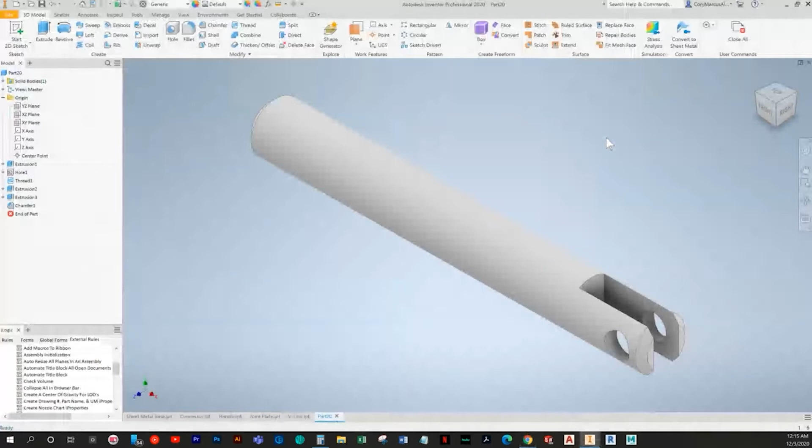So now we need to do the top view. That's going to be 0.75 by 0.25. And then we can just go and project our edge, do a collinear. And it's crazy because looking at it, you probably couldn't tell that it was just a rectangular cut. That's all it is. You just extrude it both ways, and it gives you that shape that you probably didn't immediately pick up on.

And just to make sure it looks right. Let's see, am I missing anything? I think not. Now, obviously this doesn't, well actually it does look pretty good, but if you want to see what it should look like compared to the other one, you can do a half section on the View tab, hit the checkbox after you choose the right plane, and now that looks like our guy. Now we've got to add some fillets still, but looks good. Okay, so I can just change that back to end section and do our chamfers that are a 1/16.

Just to double check, I'm gonna look at it again. And unfortunately, if I would have done the chamfer earlier, we wouldn't have to do it on two edges, but it's fine. It still comes out fine. But obviously, you know it looks right in the end, so I don't need to section it again. And it's called rod.

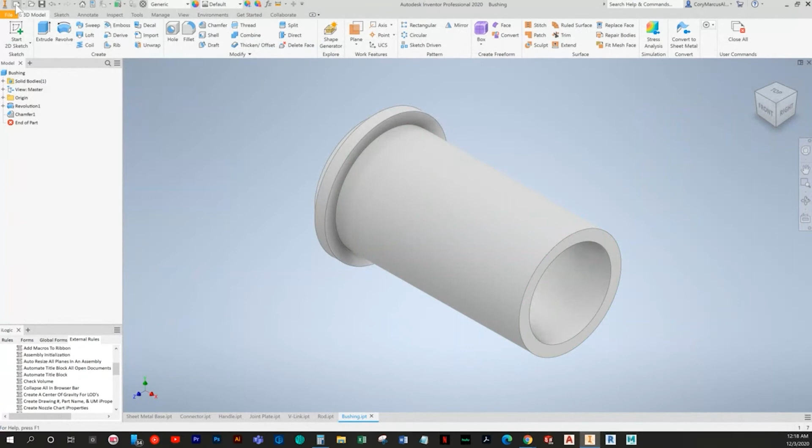Alright, so I like to usually do half values, but let's just do a center line. I need to get in the habit of using these more. They're a lot more helpful if you use them correctly instead of just spamming your drawings with them and whatnot. So it's going to be 0.625 in diameter. The hole itself is 0.5. And this portion is 0.125.

With a 0.75 outside diameter. Alright, so we have an overall of 1.25. Okay, so then we need a chamfer. Same 1/16 as all the other parts. You gotta love consistency. Alright, so check our views, make sure it looks good. Nice, okay. Bushing, is that what it's called? Yeah.

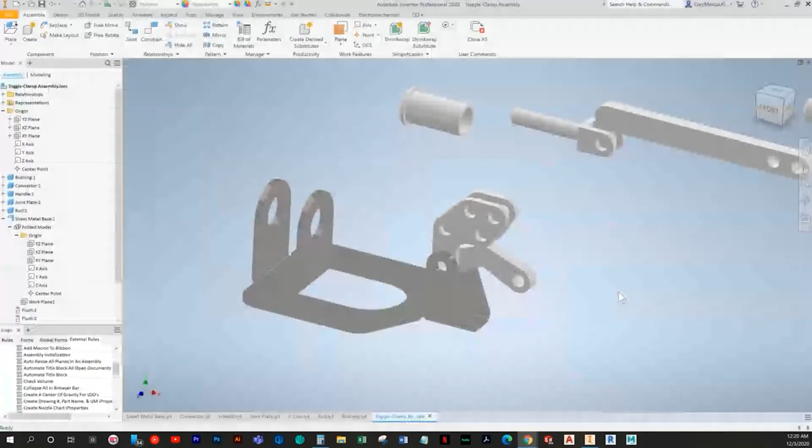So let's go ahead and assemble it now. Alright, so given this is our base, I'm going to use it as a starting point. As always, try to choose a part that you can depend on that won't change its location. And if I've done my job right, it should just be as easy as hitting flush, flush, flush. Cool. Okay. So I'm going to pull some of this junk out of the way. And let's go ahead and save it before it gets too convoluted. I botched that. Okay.

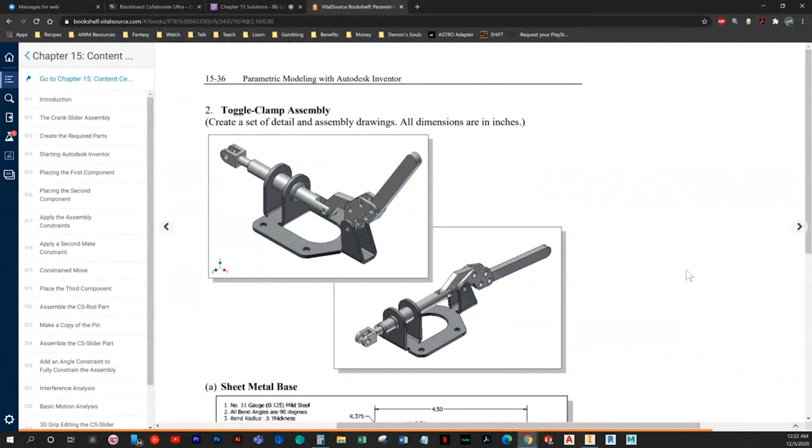Oops. Accidentally went too far there. Yeah, okay, so it fits perfect. But it actually goes to this 3rd hole, so I was looking at it wrong. Alright, so what I'm going to do is set these 2 to always be aligned with each other. So now when I pull one, they pull together. I'm going to move this guy over here and take a look. And it looks like it's constrained to that 3rd hole. So we'll do an insert to hole 3.

And it looks something like that. Yeah. So then we can constrain the handle. It looks like the 2nd one goes here. And if it's modeled just perfectly, it should be as easy as doing a 2nd insert to the 2nd hole. That's why it's nice to be exact.

A lot of times, doing an insert and an insert like that doesn't work because it locks the part completely. You have to be laser accurate to be able to achieve that. So it's usually a sign you're on the right track when you do see that. It works though. And I don't know if we'll be able to do inserts here. Yeah, that we can. Okay, I was worried because it's kind of oblique on part of it. So we can just do an insert here as well. And then a mate hopefully works. Yep, cool.

So now it should actually be moving pretty decent. Okay. So it looks like this little lad inserts here. And last but not least, wait, is this supposed to have threads on the outside? Did I forget that? No threads, okay. I mean, it kind of looks like it would need threads there, but maybe I'm just overthinking it.

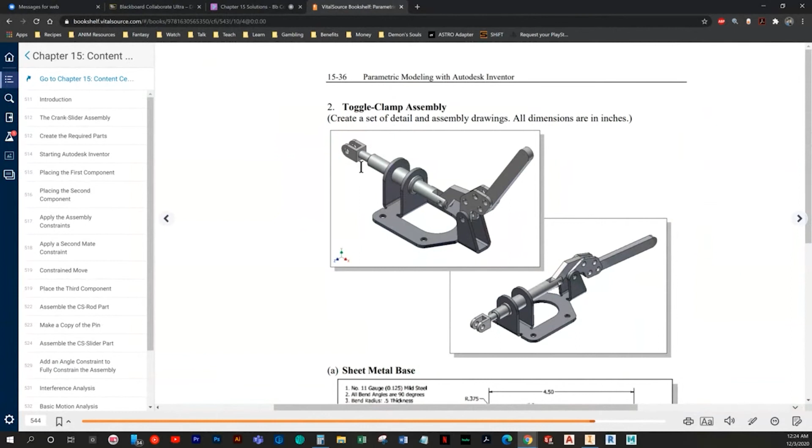Yeah, I mean, it clearly should be threads there. I'm going to go ahead and put the threads because clearly they should be there. So, is that the correct size? I don't know. Okay, so we're looking for the 5/16 10. Come on. So 5/16 is 0.3125. And it's saying, no, these are different sizes, I'm guessing, but that's fine. I'm just going to delete it, and then when I do the same thing from scratch, it'll be completely fine because threads are weird. Totally weird.

Okay, you know what? It's fine. That's fine. That's the size we need because it's 0.313. So I'm not going to worry that it has the inappropriate thread size notification. It's an inappropriate thread size if you ask me. Alright, so I'm just going to close a few of these. Okay.

And it really appears that there's supposed to be a value given for the thread, but what we're going to do is just do the end of the screw inserted to the end of that hole and see where it lines up. Okay, so that's not viable. Come on. How is there not a value for this somewhere? Shame. This is one of those things where I'm assuming it used to be there in an old book and now it's not, and that's fine, I guess.

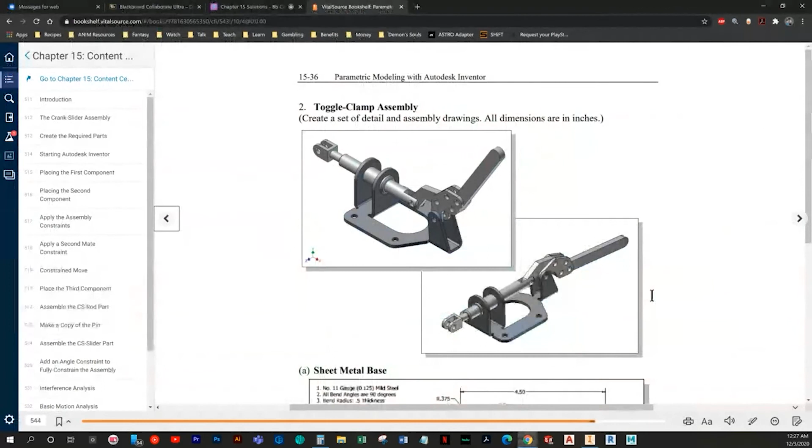It looks like it's just stuffed in there. So that's what we'll do. We'll just stuff it in, see where it lands. How about like an inch from the end? That's too far. Let's do half that. And that's fine. You know, obviously there's limits to this.

It doesn't really cover doing joints, but what you would really want to do is have ranges of motion, like limitations. So obviously I can flail it like this, but there should be a stopping point, and you can use the contact solver. There's different methods, and if you guys really want to get into that, I would love to talk about stuff like that. So that's one of those niche things that realistically it's not the end of the world, but it's really cool to know, and there's a lot of ways you can apply it once you do know that you can do stuff like that.

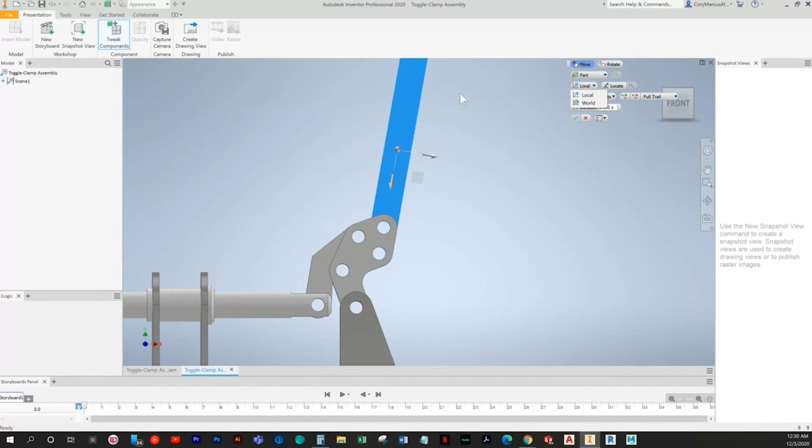All right, so there's all our ViewReps. So now we just got to go through and do the little isolate trick and lock each one down. It's quite a bit of work that goes into these, but once you get in a habit of the routine you have to go through for all these petty little steps, you get pretty efficient at it. Is it fun? No. But once you get proficient, you can start to look for things to shorten your workflow.

So like for instance this, I don't use it for you guys, but there is an iLogic rule that you can use that creates all these ViewReps with the click of a button. So once you appreciate the inefficient way, you can then start to use things like the iLogic rules that really help a lot. And the same can be said with the planes. I actually don't go through and expand and mess with all these. I use a rule that toggles the planes and turns them on and off. And those are pretty useful. So we'll mess with more of that over time.

So let's go ahead and make a position change by making a presentation and manipulating all of that. And let's go ahead and put on that shaded with edges, because that's my life.

Okay, so first and foremost, easiest things to remove, let's do first. Let's do tweak components for this guy. And I wonder if we can do... yeah, okay, so instead of doing a local means like in reference to this part, watch this gizmo. It's aligned. When I change it from local to world, it's based on the actual assembly.

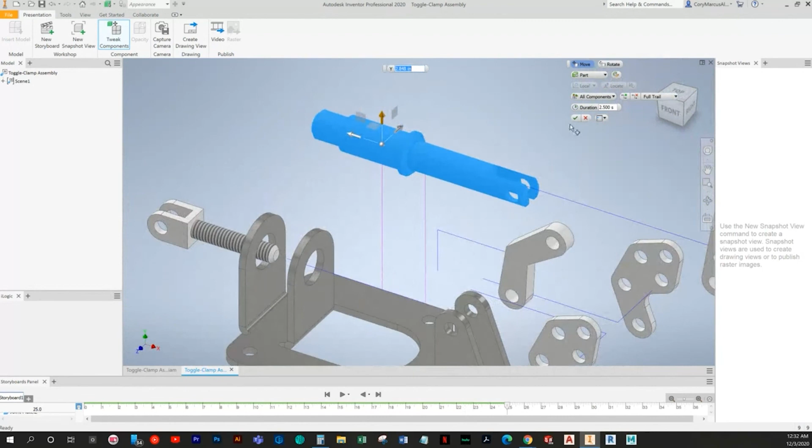And then we'll tweak this one. And I like the idea of this one kind of coming up and then over, something like that. It's not too bad. We're going to be looking at it from this perspective, so being able to see everything is always a plus.

And then I'm assuming this bushing is what really locks this part in place. So you would probably have to remove the bushing and a part together, but it's really hard to know without looking at tolerances and sizing, and I'm not going to go into all that.

Let's have... oh, it's tough to say. Yeah, okay, so we'll have these two come apart together. And then we'll have it come up. Okay, and then this portion we will tweak and have it come off of it. And this guy, we'll just bring it out.

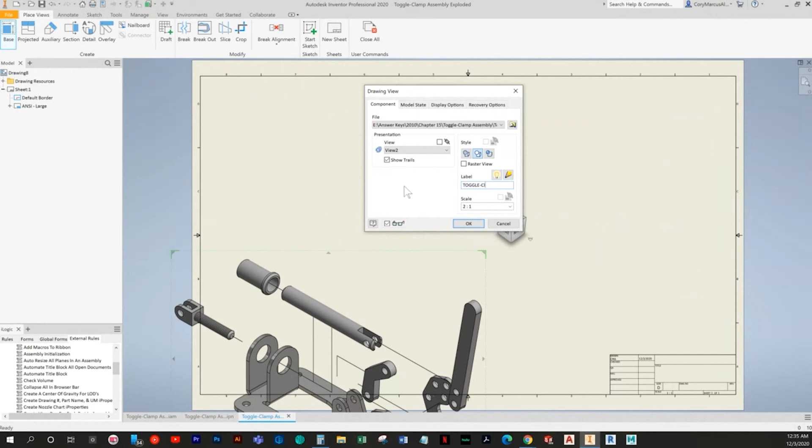So basically it's going to look like this in our isometric view, which is fine, you get the point. If I were to hit play, obviously I didn't do any timing on it, but it would slowly progress through the process of assembling and disassembling. I don't know if I can speed it up. So you get the point. I never mess with the slider because all I'm using this for really is an easy way to explode.

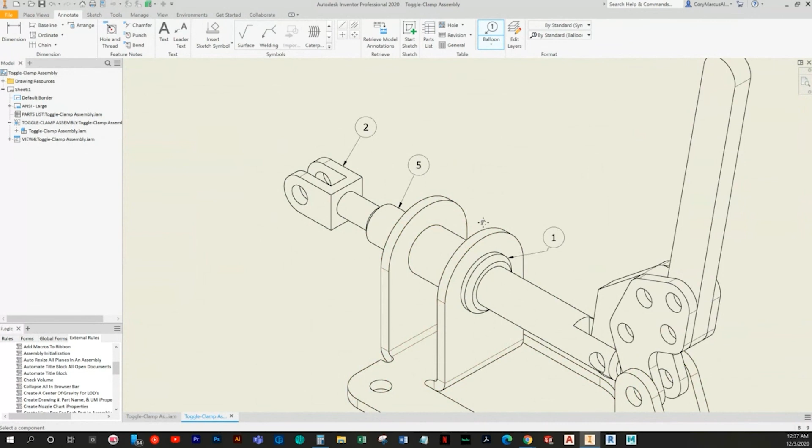Gotta love that name, assembly drawing. Classic. Alright, so that's that. We close this guy down. And we can make our detailed drawing, and that'll be it. Now, granted, this is going to be a lengthy one, but we can get to it.

I'm just going to look at our views we got and see what sticks. Yeah, honestly, I don't really feel like we need these views, just this one. So what we're going to do instead is blow these up a bit.

All right, the same deal. We'll just bubble everything.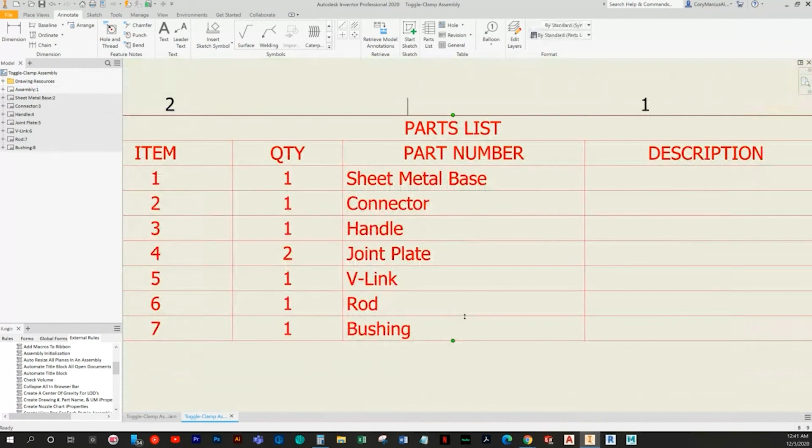Joint plate 4. V-link is 5. Rod is 6. Bushing 7. And save those overrides.

We'll sort by item. Okay, so now that we're looking at that, let's just go through and name these sheets so it's easier to remember what we're typing. Assembly, because that's what we have on sheet 1.

If you slow click, really not too slow, but kind of fast, you can rename it without having to wait forever, or right click. So that's what I'm doing there.

Joint plate. Oh my gosh, I already forgot one. Okay, so I'm just going to pull this up here then. So we have sheet metal base, connector, handle, joint plate, V-link.

Come on, you. Why you do that? Okay, so we have 2 more. Rod and bushing.

Okay, well, page 1's done. Let's go ahead and save this in case we lose stuff.

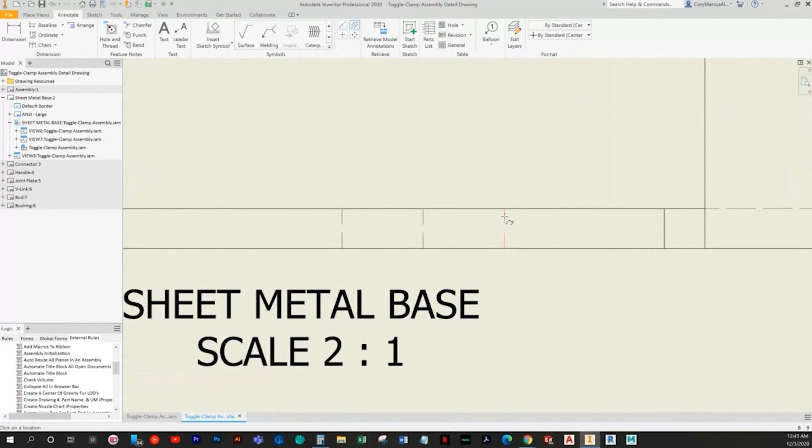Let's see, so we've got these. Yeah, okay, so that should be all of our center marks and stuff. And it has its note on the top left, but we're going to do it in the bottom right.

Alright, so number 11 gauge.

This is one thing I feel like Inventor really still has a lot of ways to go. They haven't set this up to be like Word. I don't understand how we live in a world where everybody knows what Microsoft Office is, and they still don't have a damn good editing software for text or something, like whether it be an add-in or what. It's just a no-brainer to me.

And we're going to put the right value, by the way, it's 0.05. But obviously they should have this on lock. It shouldn't have to be where you're having to hit space and manually format this thing. You should be able to have templates and all kinds of cool stuff. Maybe one day Autodesk will add it. Maybe people just don't complain about it, but I can't stand it. So I'm assuming it bothers other people too.

And I'd be lying if I said I even know what OV round relief is. It made me wonder if it's a typo. But we'll roll with it. A little small, so let's change this to like 0.25. It seems good.

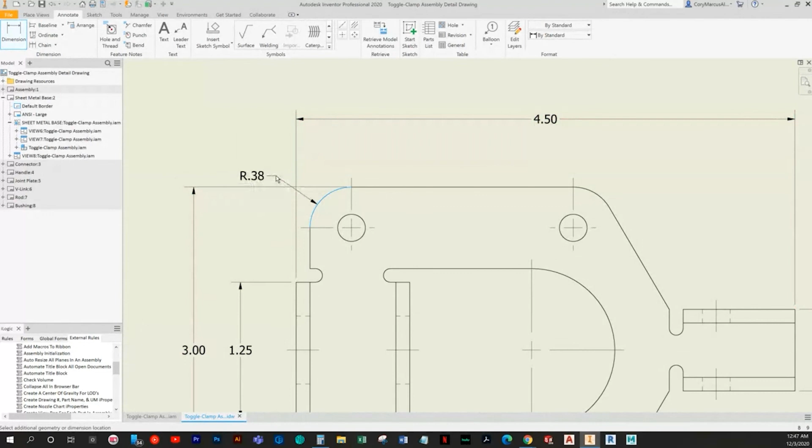Okay, so I'm just gonna kind of just do the dimensions it gives and not waste too much time talking about it. I'm just gonna slap them in pretty quick, and we have a ways to go.

I'm gonna try, if you guys happen to catch some that I don't do, make sure if it has 3 decimal places worth of value that you're adding that in. It's kind of a mixed bag on how it shows it, so we'll default to 2 unless otherwise noted.

Alright, so what's cool about doing this, obviously, is I might be wrong when I get into this view. I'm a little nervous about it, if we're being honest, because I drew this for the first time with y'all, and I could be missing something. But that's what's really cool about detailing. Yes, it's miserable, but while doing it, you can often find the error in your ways.

It's really good if you get efficient at it. You can start to really pick up on some of the things you could be doing wrong, or just catching things before you get yourself in trouble. It's good to dimension. A lot of people hate it, but it's also what saves you from mistakes. So as long as you're open to it, it's a great thing, really. But yeah, it's not going to be your favorite thing. And if it is, then good for you, I'm happy that you can enjoy this. It's not for everybody on detailing, but it is a large portion of what drafters do. I think a lot of people are in it for the creative part, where you're making cool models that look neat, but a lot of places this is like 50% of what you do. So it all just depends.

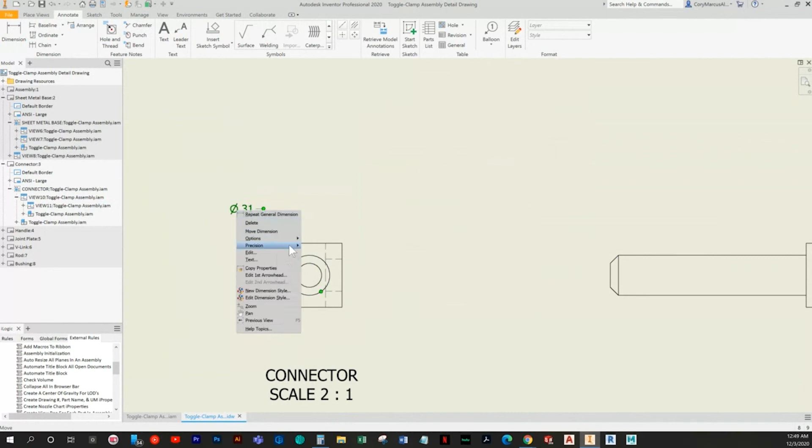But, you know, I definitely am not a detailer. Like back in the day, I would have loved the option just to model and have somebody else detail my work. And I think that some companies are kind of transitioning to that, you know, like trying to optimize people's time, because this is very redundant and slow.

And for somebody with a lot of expertise, it feels useless, you know, like, why am I doing this? I'm getting paid this much money to just goof off, basically. It is what it is. I don't mean to go on a rant about it, but I'm not a fan of detailing.

Okay, so that's it for this one. But we do need to bubble this guy. And we'll jump over to the next one. And I really like that they did these views. I can just straight copy them pretty effortlessly. Now this one I probably will do 2-to-1. Yeah, might as well.

And we're gonna start with the views it gave us. And we'll turn on the label, name it connector. It's still awfully small, but you know, I don't want to blow it up just gigantic. I like things to typically be similar in scale to the origin material.

All right, so we're given this value, and it should be 3 decimal places. Of course, we need a center mark. Some of the stuff they don't put, but we're always going to try to add anything like that. And of course, in this case, it was there, but I'm just saying, always go above and beyond, even if you don't see it.

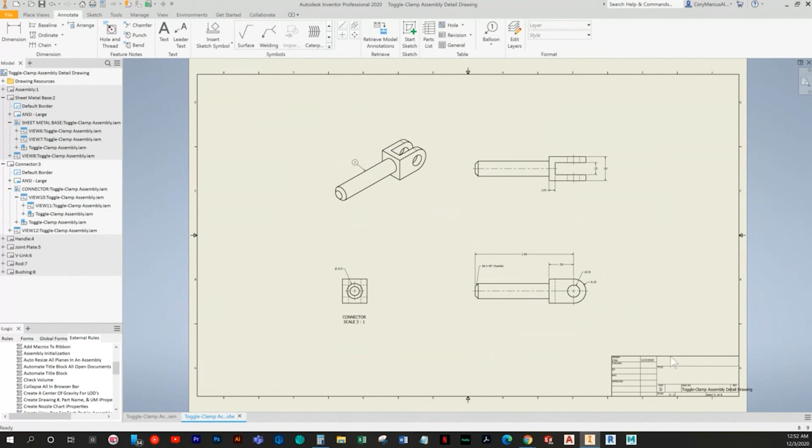All right. So we have this value, this guy, this one, and to me, it makes no sense to have them staggered like that. If you're going to put one there, you leave all this open area if you don't have it there. It's a little more convenient. Sure, it's blocking it. This probably wouldn't be how I laid it out to begin with, but there's no reason to have dimensions all around the part. At a certain point, it makes it harder to read it quickly.

So, this one's going to be 2 decimal places changed to 3. And then we could add in a chamfer note like that, but that's a lot of work. So we're just going to do the actual chamfer command. And I'm going to hook it inside and hold control so it locks vertical. I'm just going to kind of slap it roughly in line with that 0.5.

And it is really tiny. Dang, it's tiny. Okay, so we'll do 3 to 1. See how big it is. It's fine. And it'll scale the dimensions proportionally. They're not usually perfect. Sometimes they get a little out there. So if you notice, these are pretty spaced out. So you can pinch them in a little bit.

And I guess now we'll just somewhat angle that. So I'm going to adjust these to make it similar to how it was. And then let's put in that ISO view. And we'll do a bubble. And something like that. It's pretty decent.

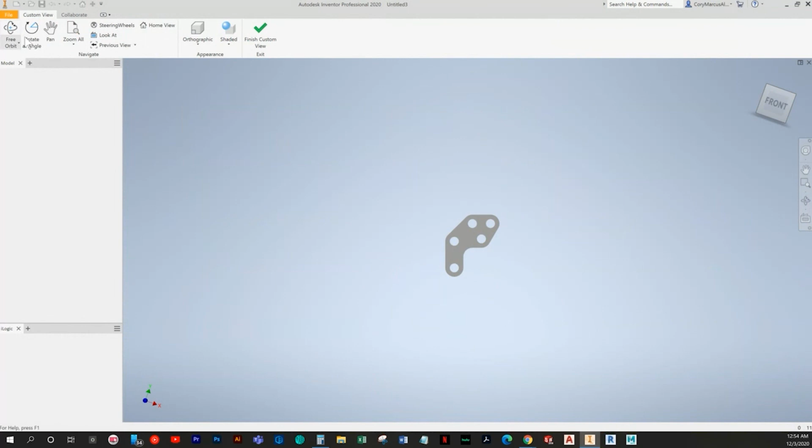Hidden lines on, turn on the view label, give it the name. And these are things you'll get in the habit of doing over and over again. So with time, you'll be choosing those options without even realizing it, really. All right, so we've got our bubble. And we've got thickness.

I guess technically, yeah, we need a center mark here as well, or a center line. Center mark. All right, so that one's pretty basic.

So now we've got joint plate. And we've got the same issue here as well. So no biggie, we'll do custom view and orientation. I just want to check this and see. Yeah. If any of these give us trouble, we can manually rotate the angles after a look at, but generally the look at is most of the time enough.

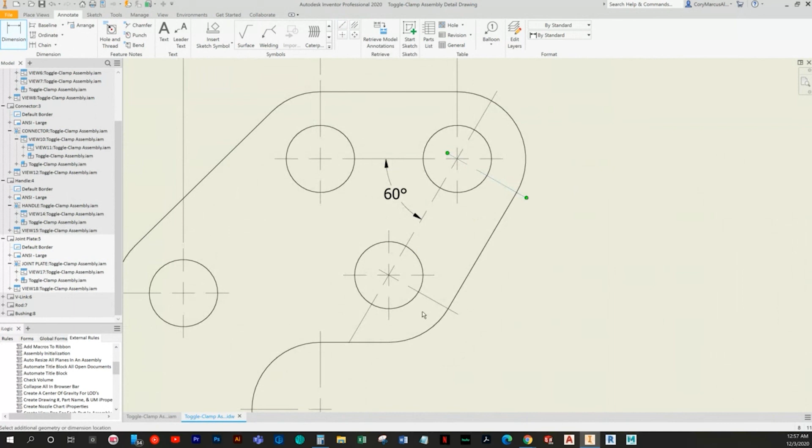So we've got this one and the bottom one. Oh no, that's okay. And then I'm just going to delete this line, and it should be in line with it. Cool. Okay, so then same thing. It should be this one and this one. No, okay, it's this one and this one. Okay, so when I delete this, it should be there. All right, so now I'm just going to go back in and add those in because it's a lot easier to just re-add those.

That's kind of one of those tricks, I guess, where you're just cheating the system. I don't know what else you can really do there besides just pull it over. It gets a little too tough to tell. All right, so we've got this value here, which should be 3 decimal places. We've got 0.5. And somehow I managed to not grab the end of that, so keep an eye out, make sure you're getting the actual tips.

And as I mentioned before, you don't need that center line, but in this case, since it's pretty simple to pull it, we're going to actually add in that angled line. I didn't expect it to go quite like that, but I'm fine with that. I just did a center line command and actually pulled it. A lot of times it'll rotate it. So we'll slap in 60. It does make this dimension a heck of a lot easier to pull.

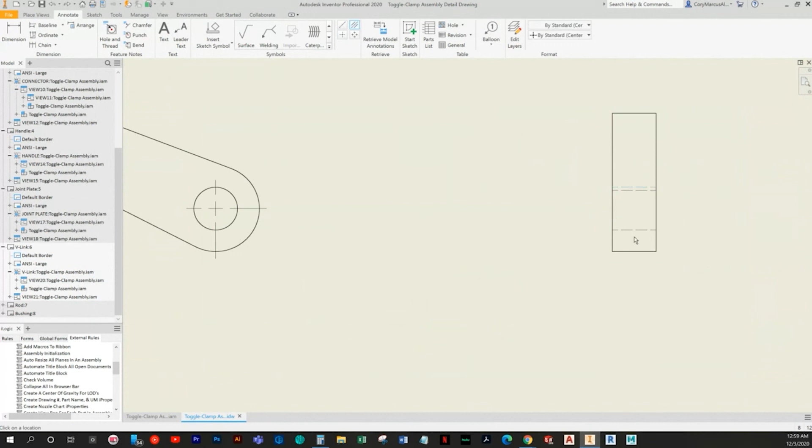Just line it up. And we'll type in 5 times in front of this. Put in our bubble. And we'll try to move this a little more proportionally in space. So maybe a little bit to the right. I mean, we have more open space here, but I don't want to get it too close to the title block portion down there in the bottom right. I'm going to save it real quick. We've been putting in a lot of work.

All right, so V-link. All right, and let's do our custom view. Look at. Perfect. Okay, I forgot to project my other views, but that's all right. All right, so bubble. We got center marks. Just to make sure, so this second line is the edge. Just to make sure, I'm going to pull and it lines up.

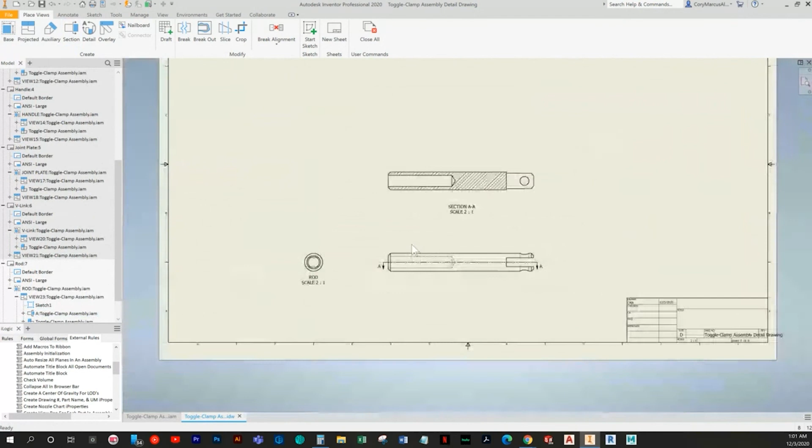I wish they would just make these view labels default. I'm sure there's a setting to default them further away from your view, but it's like you're always having to pull them away. I'm not sure why it's not just a native setting, you know? And you know what? I like the thicknesses up top. I've been trying to match, but it just doesn't have good flow that way. All right, so let's go on to rod.

Let's try 3. We're gonna go back to 2. 2's fine. Okay, so let's do this view and that view. I don't want to lose my settings, so actually we're going to rotate it. So let's do a little rotation so it flips this to be the same position as the other one, and then we're going to do a section view. Hover over that midpoint and then just project from it, and that'll give us this view.

And I still want the ISO. I'm a sucker for an ISO view. And fun fact, you can hit Home to zoom out like I do every time when you're in a drawing. It does a different command when you're in a model or an assembly, but it is pretty useful. So, you know, I can just zoom in and hit Home to quickly zoom to where you're seeing everything in one convenient position.

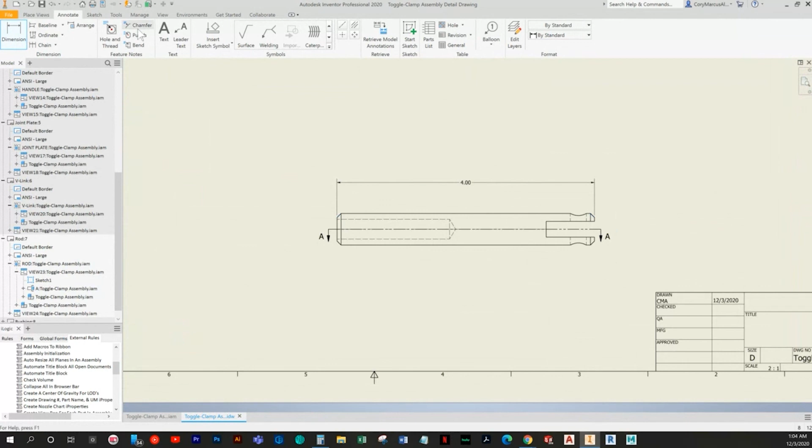So we need a center line. And even though you probably won't be able to see it, I like to be pretty methodical. So I'm going to draw it in just in case that section line is ever gone for whatever reason. And we've got the 0.5. I'm going to jump up here actually. I like the idea also of dimensions being in line. It's a little easier for me at least to scan. So I'm going to position these a little different than the book, but I do like the idea of just labeling this thread.

So I did mine a little different. I added an extra vertex in there. It works fine. There we go. 5/16, 18, UNC 3A. Yeah. Is that pretty? Not really. No, I actually hate it, but it's fine. I thought it would look better than it did. So yeah, it's fine. At least it's more legible up here. Do I like it? No, I don't. You know what? I'm just going to delete that leader portion, and then I'll just click Add Leader, and I will redo that. And I'll just move it down here.

Okay, so now we've got this view. And before I forget, it's going to be here that I'm going to do my chamfer values. So for the heck of it, let's do 2 times again, just because I'm pretty sure that this was the one that I almost missed it on. So obviously it's pretty easy to miss. And we'll do our dimensions for this guy. Unfortunately, that's actually in the way, so that's why we're going to dimension it here and then pull this off the model. I always try to avoid dimensions on the model. Sometimes you really don't have a choice, but you want to work in a civil way where possible.

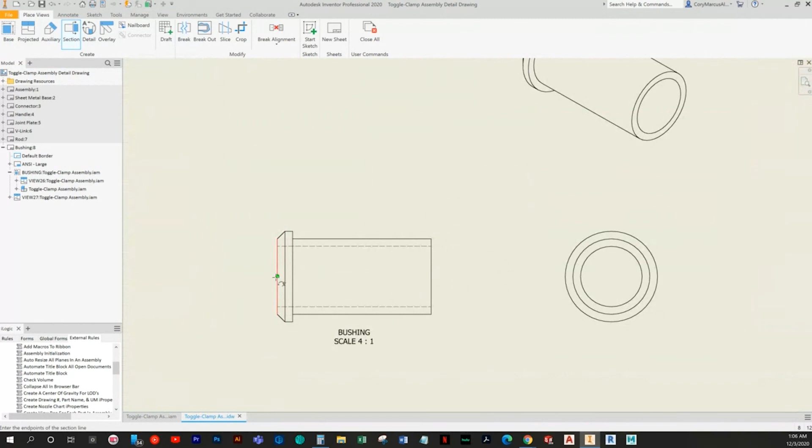And we're missing a center line here. That's what I was worried about. Okay. Maybe we can do a bisector here. Perfect. Okay. Let's pull that out, give it a bubble. Okay. Not bad, not bad.

Alright, so last but certainly not least is the bushing. You know what? That thing is really tiny. I think I will actually leave it at 4:1. But we're going to maintain the same positions we were given. And we'll do a section. So what you do is you click the view, you hover over that midpoint, which is a solid dark green like that, and then you just draw it, making sure it's horizontal.